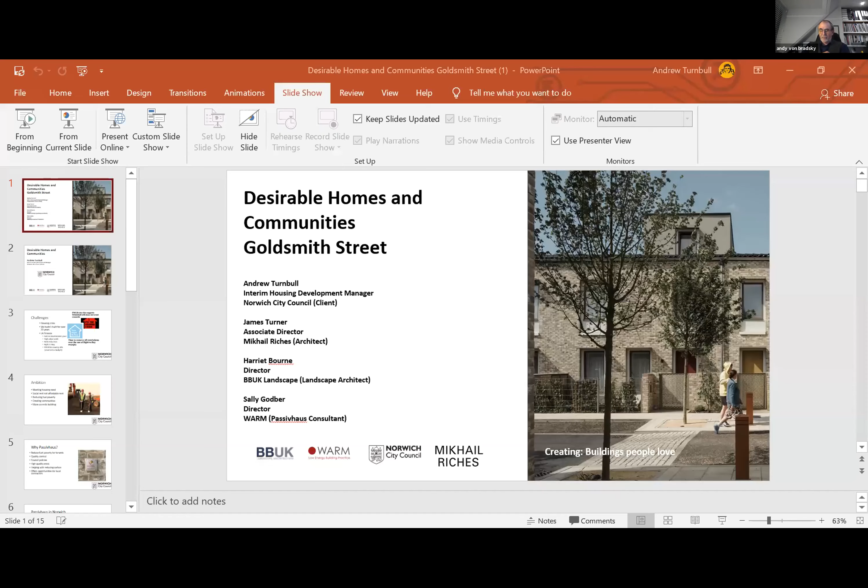So, tonight you've got myself, James Turner, who is the Associate Director for Mikhail Riches Architects, Harriet Bourne, who's the Director of BBUK Landscape Architects on the scheme, and Sally Godber, who's the Director of Warm, who are our Passive House consultants. I'm the Interim Housing Development Manager at Norwich City Council.

Been an interim now for, well, it's getting on for 1.5 years, so it's about time it was made permanent. But just starting off with how we've got to where we are and how we kicked off with Goldsmith Street. So the challenges that we have as a council are, obviously we've got a housing crisis, we've got housing needs in Norwich for at least 240 social rented homes each year.

As a council, we hadn't built for over 20 years. I think 1992 was the previous scheme that we built. And primarily that was down to right to buy, which kind of prevented us from using our money to build.

We had a number of other challenges around our finances, with cuts in government grant, threats of high value voids that we would have to pay subsidy for our high value properties, a 4-year rent reduction that took, I think, 30 million out of our 4-year plan and 250 million out of our 30-year plan. Increased right to buy through it, the discounts being reinvigorated, and we've had issues with up and down on Public Works Loan Board borrowing rates.

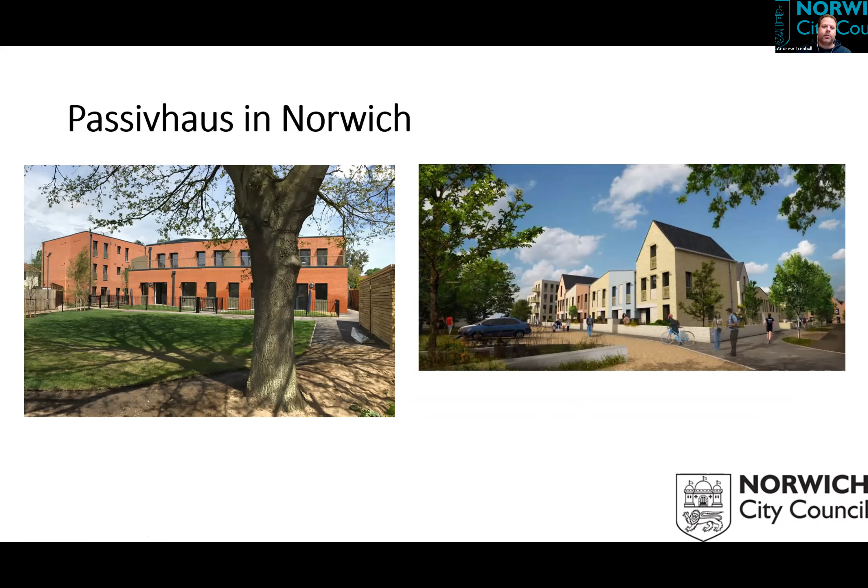And we felt that was a bit of a waste of space within the city. So having looked at that, and having talked to the county council about buying that care home, we felt we could actually form a better site and really up the density in this area.

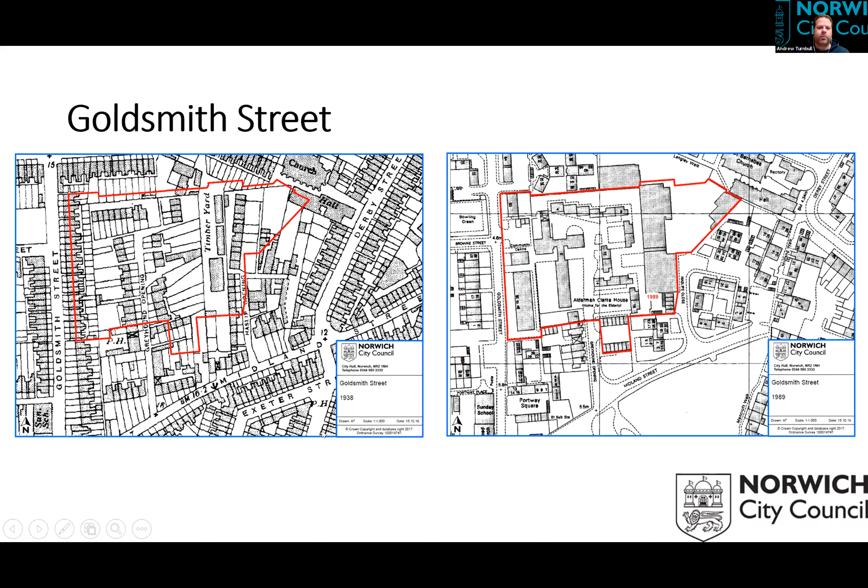So the decision to decommission the sheltered bungalows, which you can see in the picture, was taken in 2007. We were then working with 3 registered providers rather than delivering it ourselves, and we persuaded them - there were a couple of really forward-thinking people in the council.

One, Jamie Radcliffe, who's now an executive director at Network Homes, and our design and conservation manager, Ben Webster, who's still with us. We managed to persuade those registered providers to go down the route of a RIBA competition to select the architects. So we ran that competition in 2009.

The 3 RPs, for various reasons, then kind of dropped out over a period of 3 to 4 years. And what happened in the meantime in 2012 is that the government announced they would relook at the housing revenue account and allow local authorities to keep all of the rents they received from their tenants. Prior to this, Norwich had to pay £9 million a year in subsidy to support the national housing revenue account. So by keeping all those rents in return for taking on a proportion of that national debt, it meant we had about £30 million worth of headroom.

Number one priority for our members and for our tenants was to build more social housing. So in 2014, once we got our heads around the amount of money that we had and what we wanted to do with it, we re-engaged Mikhail Riches because we were party to that original competition. We were able to just pick up the phone to them and start again. I think I did worry David Mikhail, I don't think James was in the room at the time, by saying, oh, we've had a look at it and that design you've done, we really like it, but could you just make it passive house as if it was the easiest thing in the world? So once we'd got that on board, in 2016 we achieved planning permission, and in January 2018 we started on site. It was about an 18-month build period. So we completed the first phase, and I'll come on to that in the next slides, in June 2019.

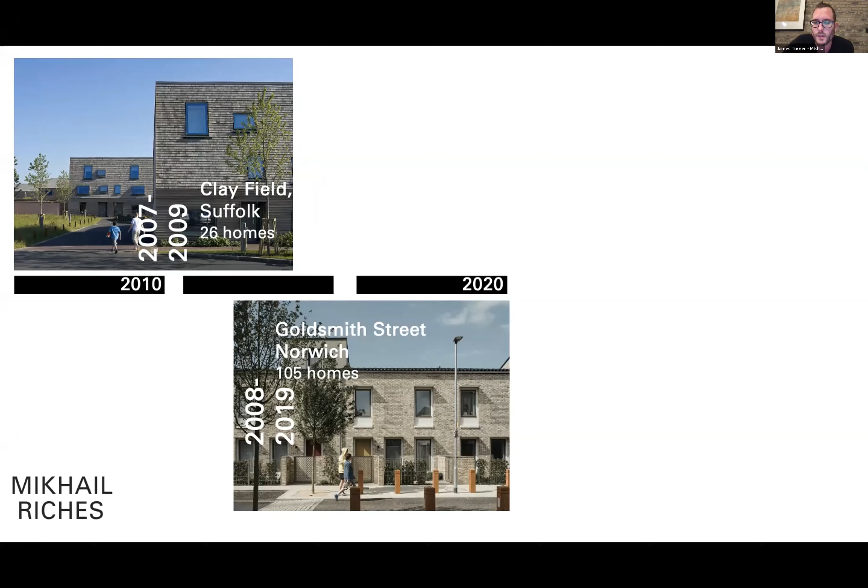That's something I'd say that in our work moving forward now as a practice, we're finding that to get good zero carbon schemes to come forward, the master plan is essential. And I know as part of the brief that Tabitha's put together, there's a real focus on zero carbon. Understanding simple things like sun orientation is absolutely key, and if you get that wrong from the start, you'll be fighting against it all the way through. So there's a little opening tip.

Just in terms of Goldsmith Street, obviously Andrew's already said, and Andy, we've won a number of awards. It has been put on a bit of a pedestal, and it's slightly bashful sometimes when people say lovely things about it. But I think what's really important is that we share that learning.

I think the real key takeaways are this idea of a low energy passive solar design, so embedding a solar strategy into the master plan. Passive house we use very much as a shorthand - I think Andrew and Andy's point about quality is key, and passive house gives you a route to getting to zero carbon by embedding it in the fabric of the building. That's a very simple takeaway from this talk.

My introduction to Tabitha was actually at a conference where I was speaking and she didn't realize this was timber construction. I think maybe a lot of people don't realize that behind this brick facade, there's actually a timber frame that's insulated with Warmcel. We work with a company called Signum Timber Frame, who built the frame in a factory, so it's a kind of hybrid MMC project.

Because of the width of the walls, we built part of it in the factory and then balloon-framed it on site and filled it with insulation. That's something we developed with them as the supplier. And then, I'll come on to this, the ability of a timber frame to reduce your carbon impact is huge.

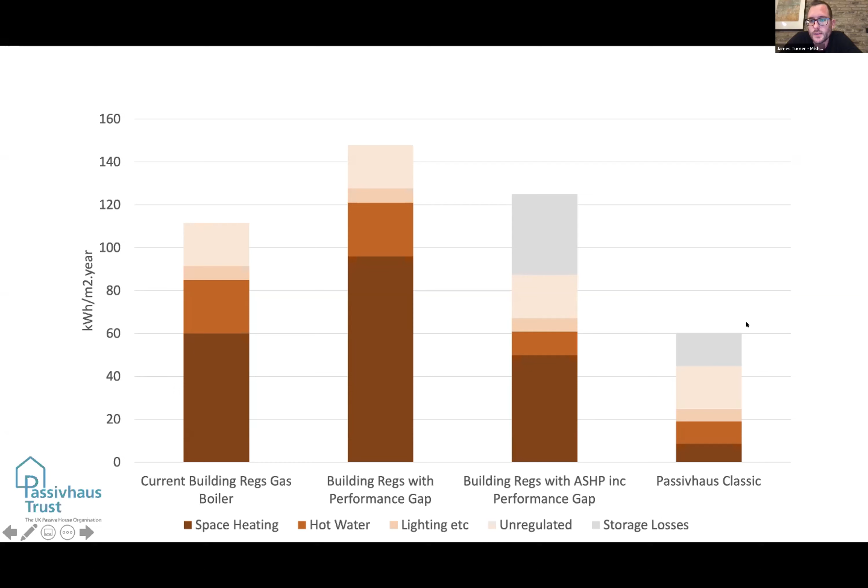The difference you can see between these different charts is what's called the performance gap, and that's something Passive House drastically reduces, because you very much get what you designed with Passive House. I'm sure Sally will expand on that later. In simple terms, you can see the difference between where building regs are currently targeting and where you are with Passive House - so very low energy demand.

From a fuel poverty or resident point of view, you're looking at a bill of around £150 a year for a 2-bed house, so very low. Long term, without that performance gap, your energy demand stays fairly consistent, whereas otherwise it's almost increased exponentially over time from the point it was constructed.

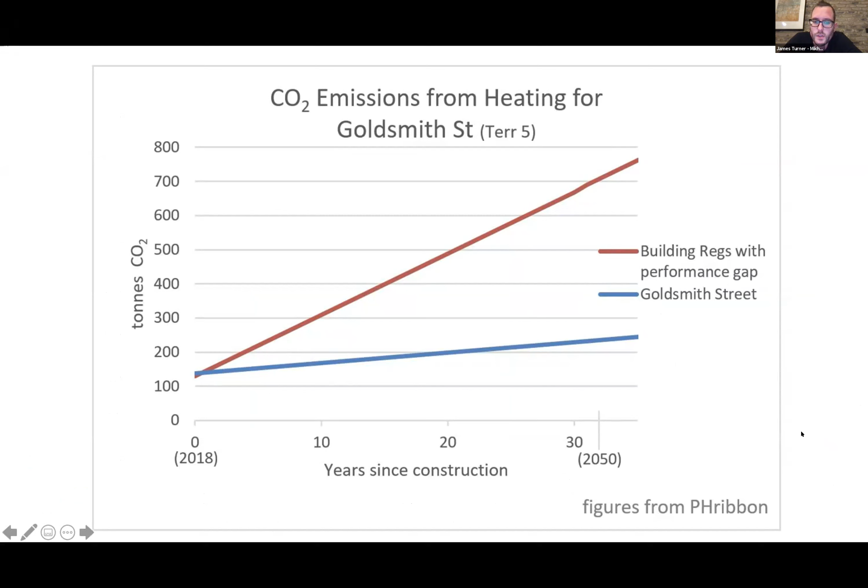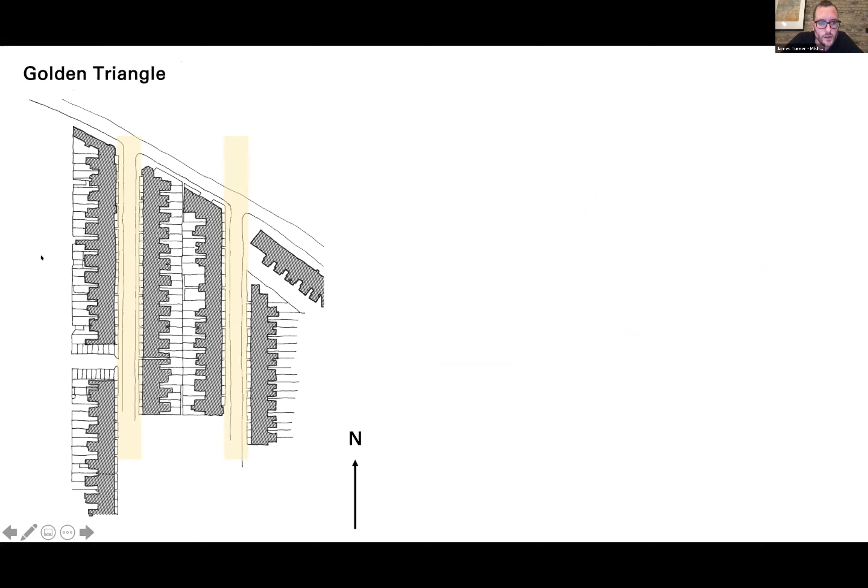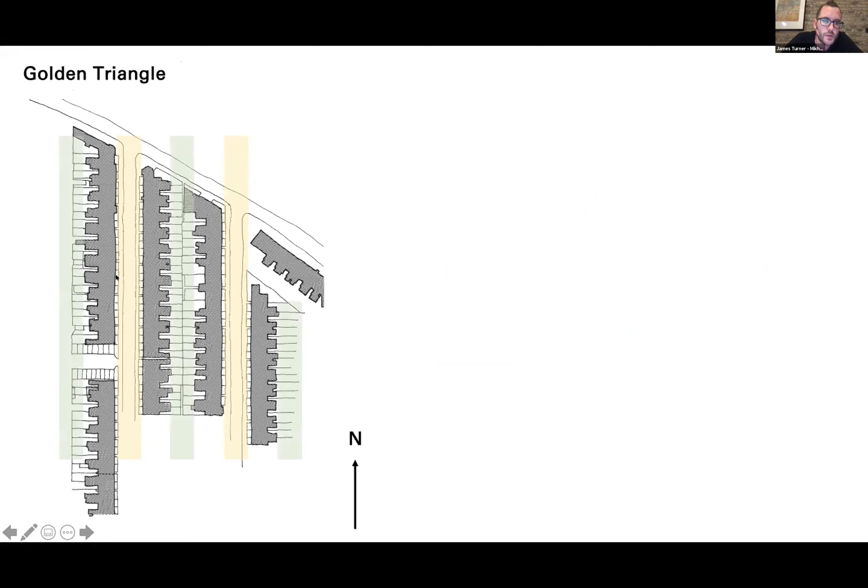Just to expand on Andrew's history of the project, one thing we did at competition stage was really look at the local vernacular, in particular the terrace streets of Norwich. This drawing on the left shows typical 19th century Victorian terraces with a 14-metre overlooking distance between the fronts and a 14-metre overlooking distance at the backs. We took that and turned it through 90 degrees with an east-west street direction, which gave us our solar master plan and echoed that local urban grain.

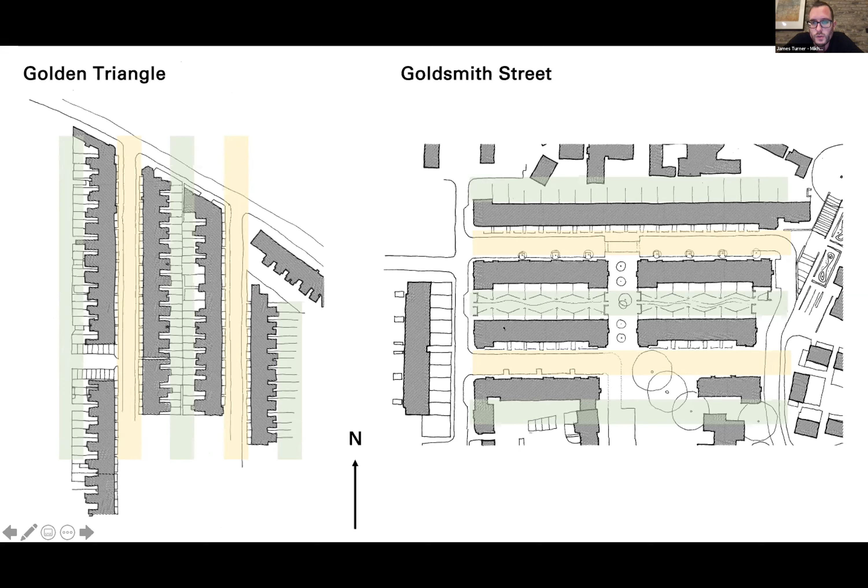That was really well supported by the planners, but it also meant we got more development on the site by compressing the overlooking distances while still creating good spaces between the buildings, which Harriet will hopefully expand upon. So that's what it looks like as a site section.

I think critically, again a very simple takeaway from this presentation, is understanding how the sun moves around the site. I've mentioned the east-west solar aspect, but it's also about understanding how you get sun into a building in winter, and making sure you don't have one building overshading another.

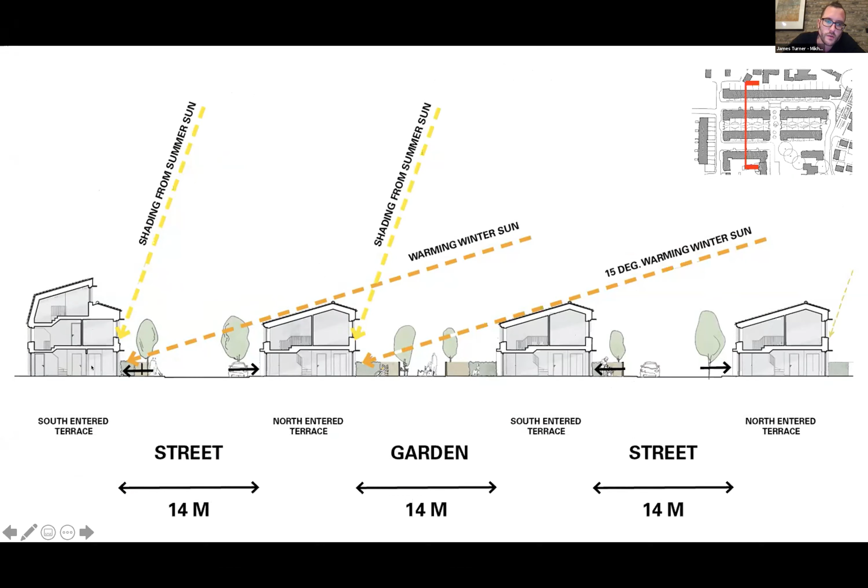So, a quick overview of the overall master plan. I think what a lot of people are surprised about with Goldsmith Street is it's a very simple scheme - not a shouty scheme. You've got terraces of houses with flat blocks on the end, and really nice, generous communal garden spaces between terraces where only residents can access. So it's lots of very simple ideas, but I think the execution and the quality of what we've done is the hard thing to achieve.

Something worth noting as I flick through these pictures is the spaces between the buildings and how they work. Architecture doesn't just stop at the building elevation - it's really considering things like your front garden wall, gates. These are south-facing gardens, and I don't think I've ever seen a scheme where front gardens going directly onto the streets have been so well used by residents. I think that's testament to the landscape design and the feeling of security from having something as simple as a gate on your front garden that's immediately open to your kitchen.

Other little details are things like meter boxes - we've worked really hard to conceal them across the scheme. We've allowed small spaces outside people's front doors where, within a matter of weeks, residents have taken ownership over that tiny little space directly onto the public pavement, putting their own doormat there. I think this is really lovely and shows that sense of ownership within the scheme.

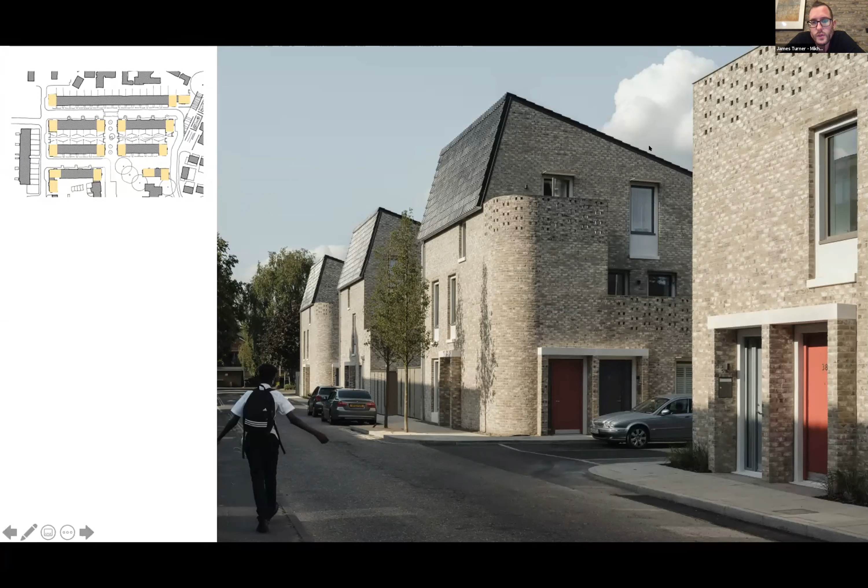There was a point earlier about COVID. I think one of the particular ideas around Goldsmith Street with respect to flats is there's no common parts, which is quite unusual. A lot of schemes have a lift core and shared entrance with a series of flats off that space. One key issue Norwich has with their flat blocks is the common parts, and people doing things in there that they shouldn't be doing. We took that as part of our brief and decided to develop a scheme with no common parts.

Each of the flat blocks at the end of each terrace has a door which directly accesses onto the street, so everyone has their own front door. Especially in this current situation with COVID, that sense of ownership and independence of not having to share a space with other people must be a fantastic place to live compared to other situations.

Looking at how the building performs against the 2030 targets, which is part of the criteria being looked at - the energy demand is very low on Goldsmith Street, primarily done through Passive House, fundamentally reducing energy demand from the outset. Interestingly, the focus of our brief was to achieve Passive House, but since then, and since the Stirling, there's been a focus with the climate emergency on embodied carbon within buildings. We retrospectively looked at how Goldsmith Street was performing, and it's coming out close to the RIBA 2030 targets without us really pushing it.

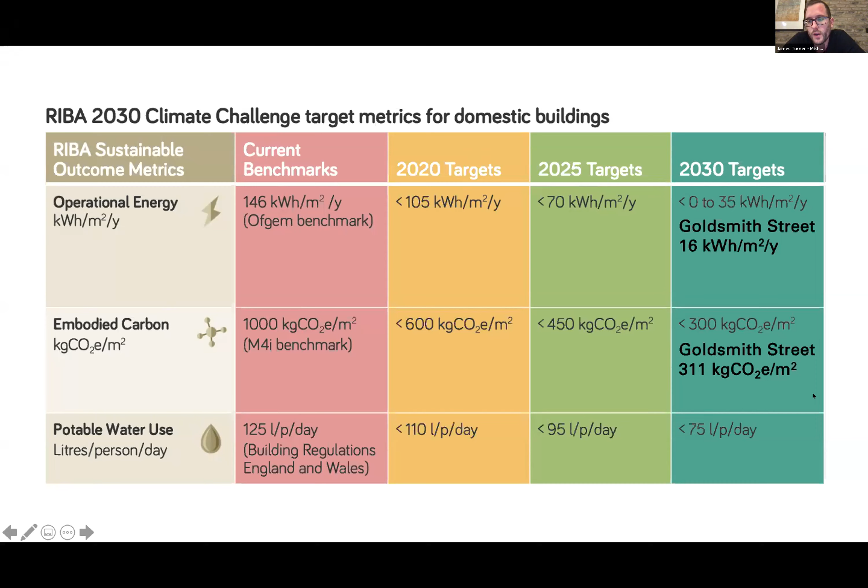That's something we're doing on our current schemes. Interestingly, that's primarily due to the timber frame and timber sequestration. So just broadly, that's how the carbon is counted within the project.

Thinking about the palette of materials - this is a low cost project, and we thought very carefully about what materials were specified, their durability and maintenance. That's worth noting as a quick takeaway.

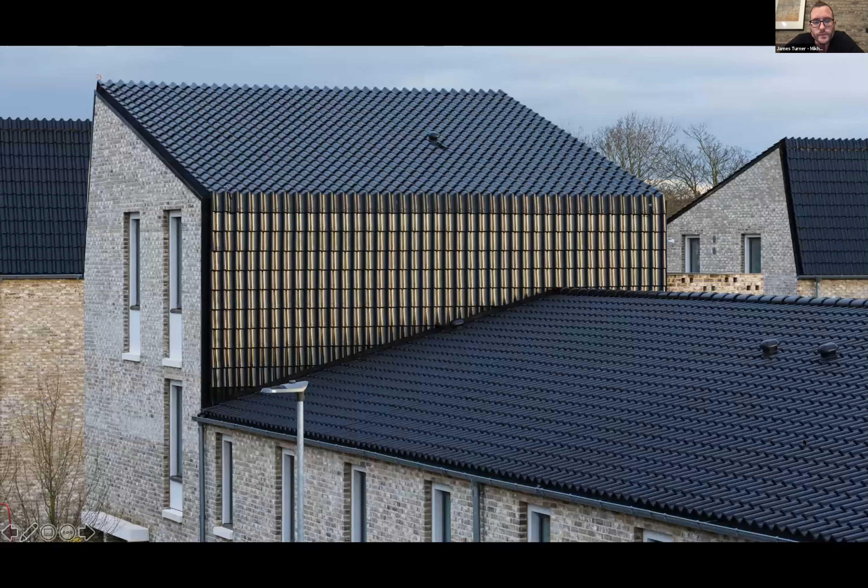Lastly, one of the huge changes we made during the scheme - it was coming in over budget, and we made a call to change the roofs from zinc to tile, which offered a huge saving to the project. One of the things that worked incredibly well as a process on Goldsmith Street was the value engineering, and for me this shows that value engineering can be beautiful. And with that, I'll hand over to Harriet.

Sorry, technically a bit incompetent. I am not at the point I thought I was at. I beg your pardon.

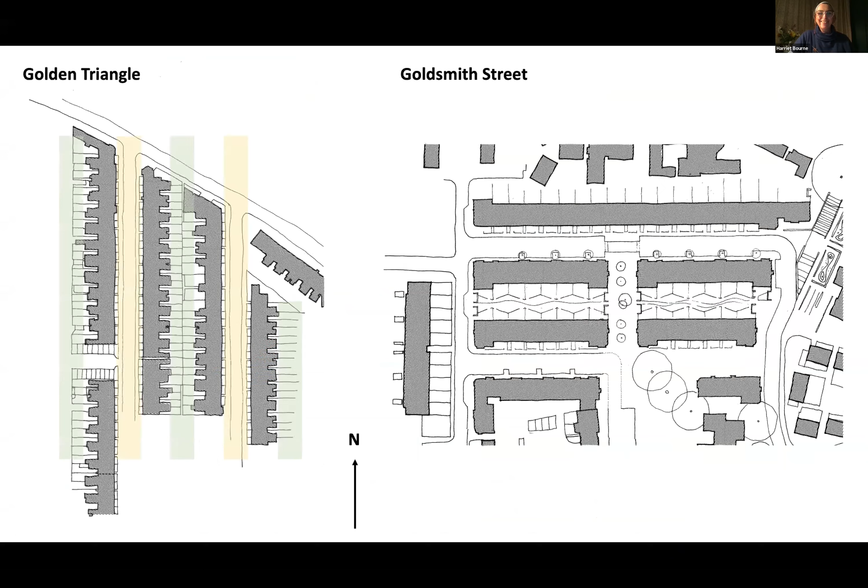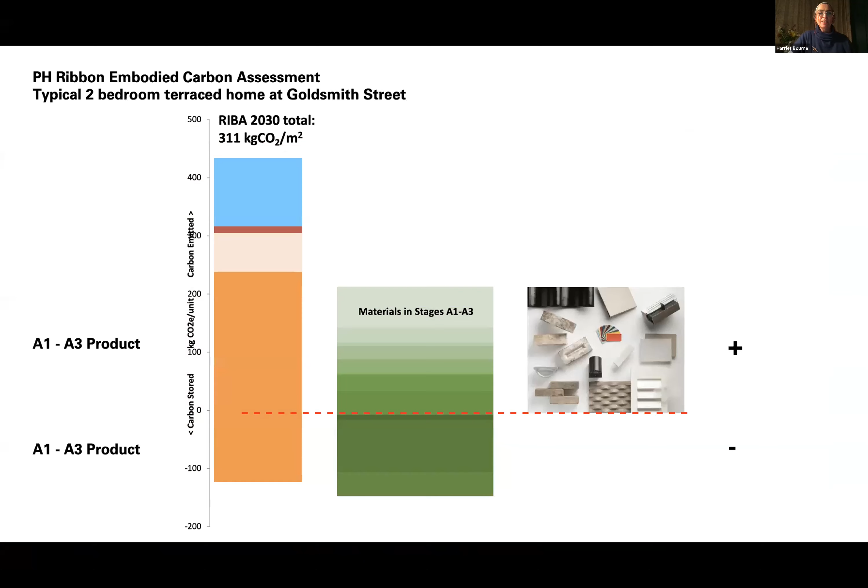Nearly there. Lovely pictures you can see again. I was lined up on the right page, so apologies. I'm blaming my computer. I'm Harriet Bourne.

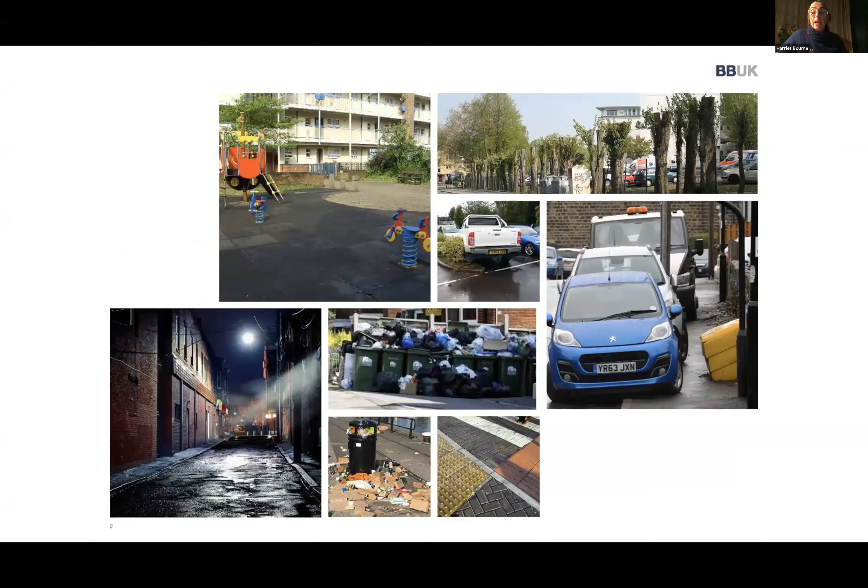I am director at BBUK Landscape Architects. We worked with Mikhail from about 2014 onwards, looking at, not surprisingly, landscape and public spaces.

I've started with this rather unbeautiful slide just because I think it's important to understand that however beautiful the houses are, and the houses are very beautiful, if the landscape isn't right, or if the spaces between the buildings isn't right, then it's just never going to work.

For example, if the play area is in a sea of horrible black rubber crumb tiles, it's not going to be well used because it doesn't feel safe. If the streets aren't overlooked, then they're going to be empty. If the streets aren't designed to take parking, then people are going to park on the pavements, and there's going to be nowhere for people to walk. If there aren't spaces for people to put bins, then the bins are going to sit on the street, and they're overflowing.

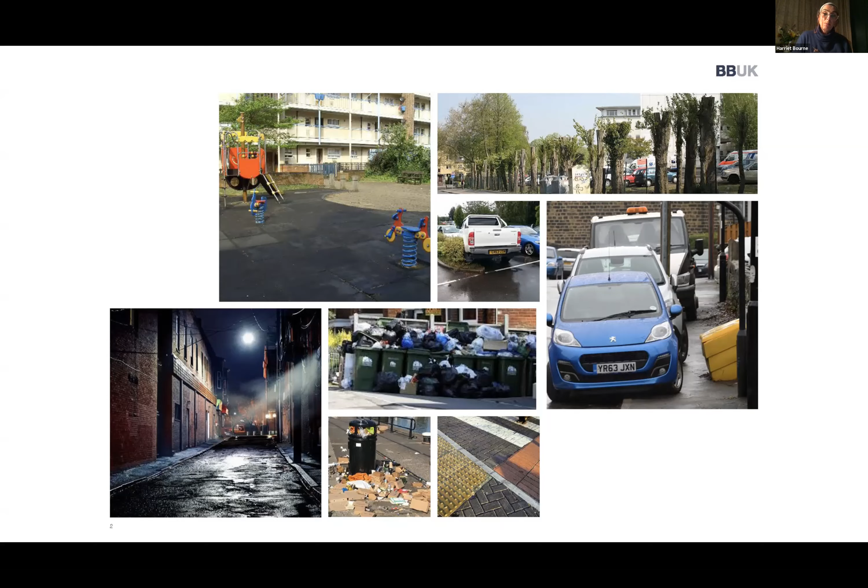Alongside that, another thing that is really important is obviously maintenance. If a scheme isn't maintained properly, the buildings will crumble, but the landscape is the first thing that you see. So if there's rubbish on the ground or the trees aren't pruned properly, then the whole place starts to fall apart. And what makes a truly sustainable scheme, not just in terms of building fabric and low-cost heating bills, is the community. If the community isn't truly sustainable, then the scheme is not going to last.

So when we look at a project, we start by looking at the way that people are going to use it. One of my very favorite artists is Bruegel, because he centers his work around people with activities, and not just one activity, but a whole variety of activities, which is what you get in real life.

So you want to be able to feel safe so that your children can play out on the streets. You want to feel that you've got places where you can meet your neighbors. You want to be able to park your car safely. You might want the car to be able to drain into a space which is going to attenuate the water so you don't get flood issues. And you want to be able to stand and gossip with your neighbors over a fence.

On top of that, we want to make sure that the place is enhanced with planting, with appropriate planting, that has interest all year round, but also has a seasonal interest, so that you get an explosion of colour and flower in the spring and summer, and then it might die back in the winter. But particularly in an urban area, seasonal interest is really important, and it will also start to bring in insects and butterflies and birds.

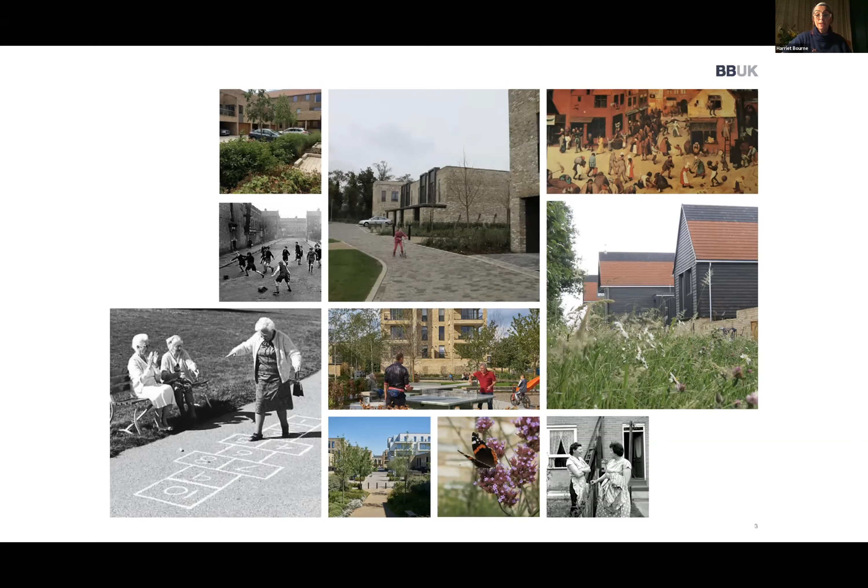The what we're calling semi-public routes, which is where you might go through a more planted space, which might have local doorstep play for the younger children, through to the semi-private spaces, which are the spaces between buildings, which are only accessible for residents within those terraces that open out onto that space.

And then the public open spaces, which connect through to the local context, so the local existing housing, because that's one thing that we felt was really important, that it doesn't sit isolated on its own, this brand new lovely development with lots of architects going to look at it because it's won prizes, but actually it talks to the people that are already living in the area.

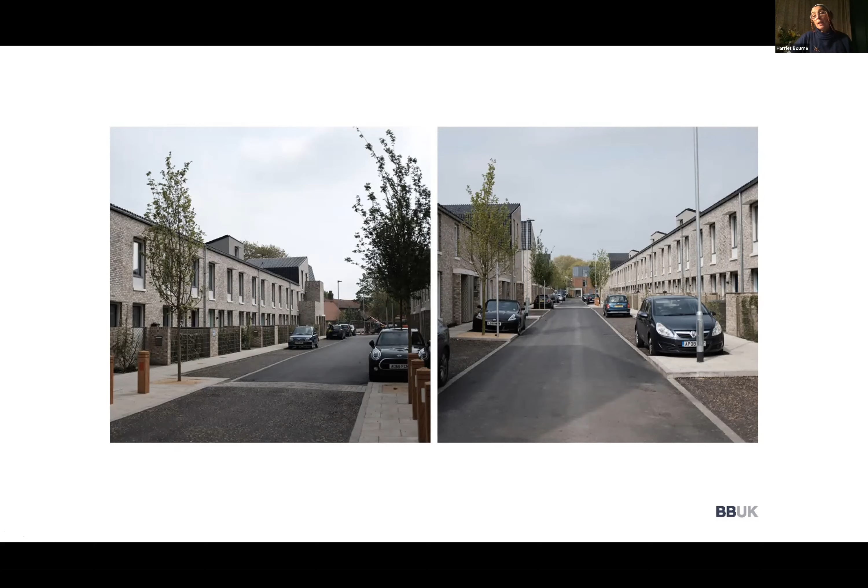The other thing we did with the front gardens was - originally they had hedges to separate the front garden from the street. Part of the value engineering exercise was to take the hedges out and put in fencing. We've planted ivy up the fencing so that when it matures, they will be greened boundaries. We managed to save a lot of money by taking out hedges and having this kind of fence and climber instead.

As James pointed out, people taking over these spaces for themselves is really charming. House number 2 put up hanging baskets, and since those baskets went up, houses 4, 5, 6 and 7 have got them too - so we've got a whole row of people with baskets hanging from the porch. Other people have put furniture out the front where they sit and chat to people and their neighbours as they walk past, and others have added bedding plants and gnomes to their gardens. So there's a real variety.

Unusually, we did a planting scheme for all the front gardens, most of which is staying, but other people have taken what we proposed out and put in brighter coloured or different plants, which I think is also really nice - that they've taken ownership.

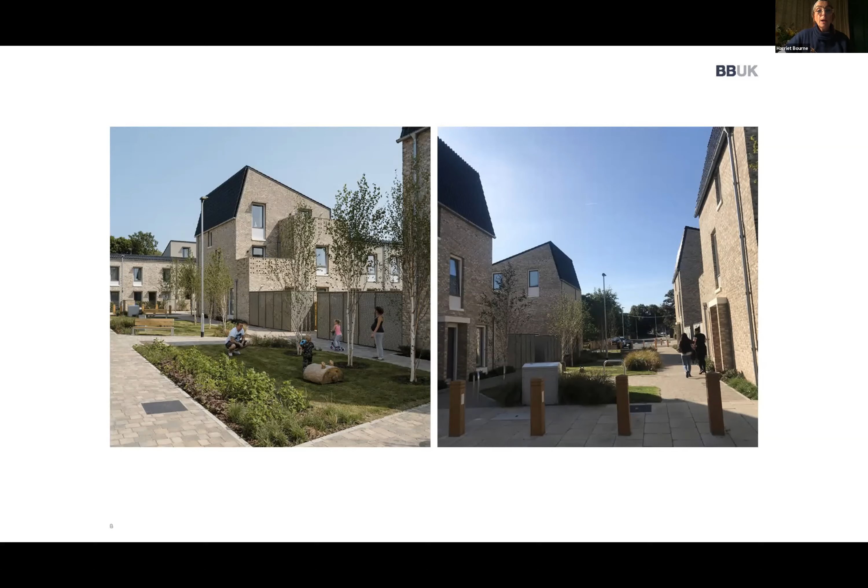The semi-public spaces, which are the non-vehicular routes through the site, have got doorstep play. This encourages people to walk through the site rather than drive, because there's something for the children to do on their way through. It's also an opportunity for the community to meet people that aren't in the terraces that open onto their Ginnel - they're actually available for everybody across the whole site.

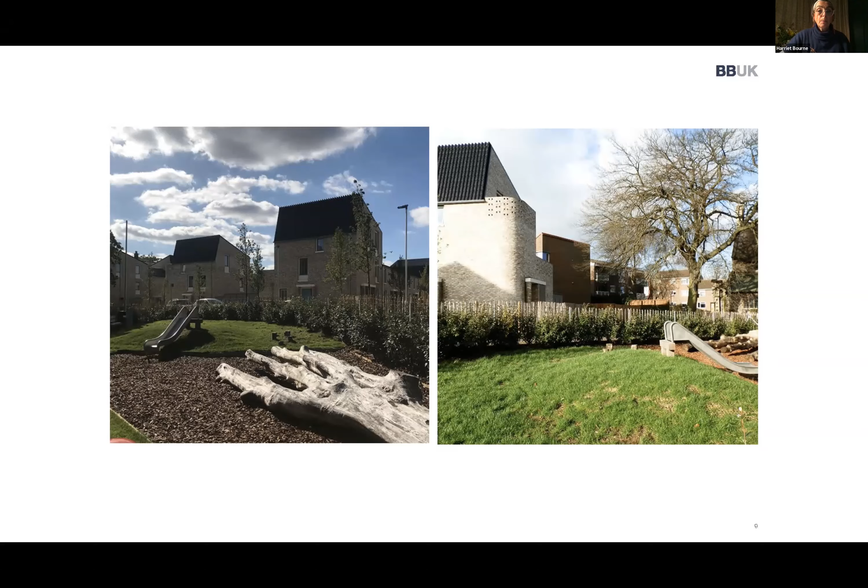And then the more informal kickabout area, which is centered on a couple of existing trees, one of which actually died, so we replaced that with 2 further trees on this site. We've planted about 5,500 new bulbs, and I'm really hoping that lockdown restrictions lift so that we can go and have a look at those coming up this year. I think, Andrew, you'll be pleased.

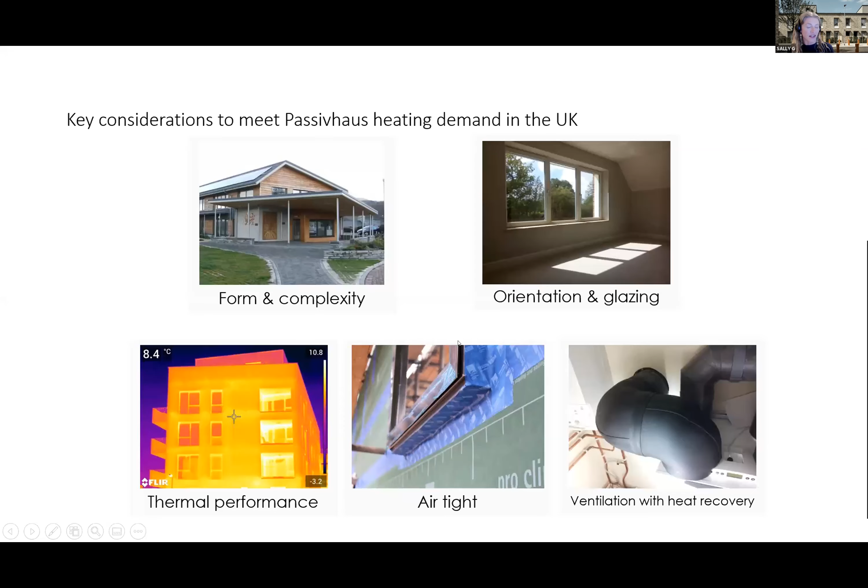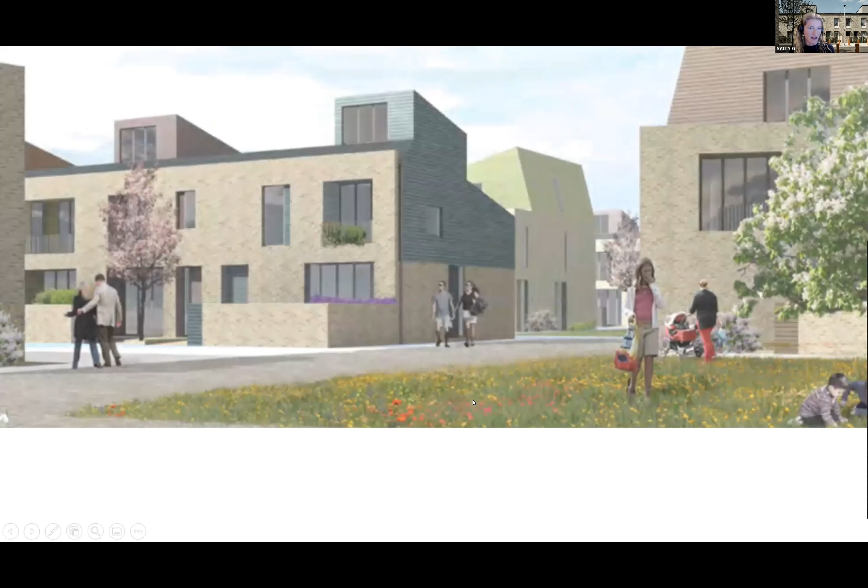On form and complexity - I'm hoping that, having had Passive House rammed down your neck fairly significantly by Tabitha, you really understand how important it is to think about surface area. Heat loss is a function of surface area - more surface area, more heat loss. That's the Passive House starter pack, and I'm assuming you've all got that.

When we started looking at this scheme, this is what it looked like when we first got involved. We were pretty happy - we had a load of terraces and a lot of repetition. This is the first point I really want to nail home: when you're looking at a quality product, be careful about the amount of complexity you put into a project. That's the most important tool you have. All that complexity adds cost to the scheme if you want it done well. So if you want something done well, having a lot of repetition is a huge opportunity to do a good job of it.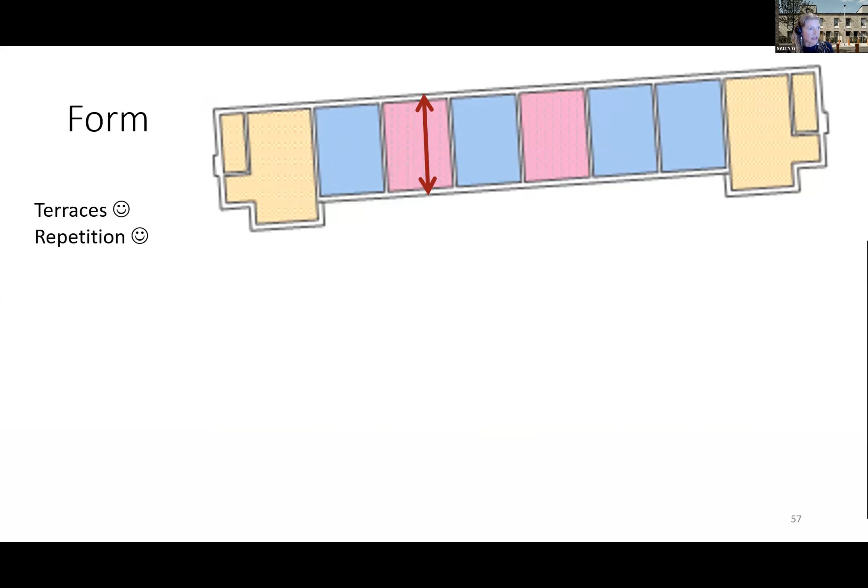There were a couple of things that made it quite tricky though. In terms of form particularly, the layout meant the front-to-back distance was actually quite short, so because the buildings were wide, there was quite a lot of surface area - the form factor wasn't as good as we originally expected. To put that in context, compared to another scheme we just completed, Rainham in Essex, which had a really narrow width but very long front-to-back depth, the difference in heating energy was about 1.5 kilowatt hours - which compared to our Passive House maximum of 15 was quite considerable.

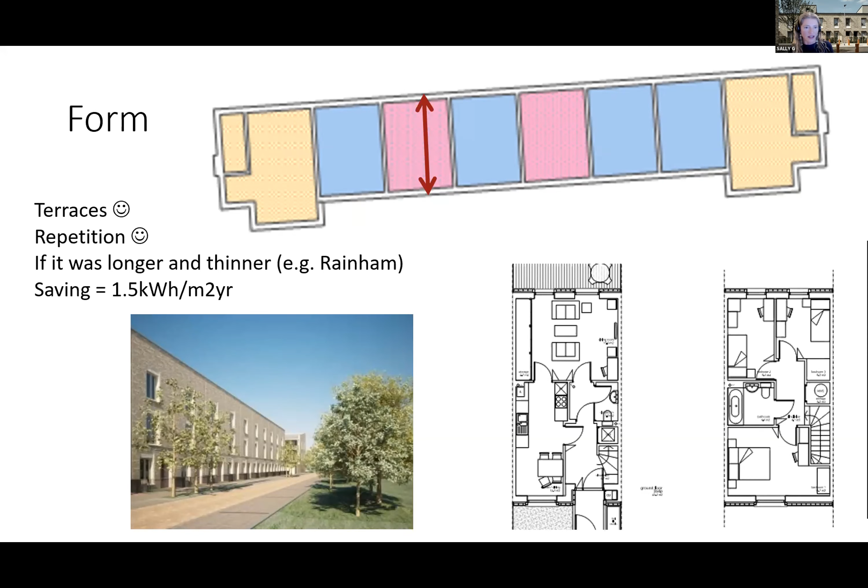There was a long discussion about the impact of changing the shape and looking at the plan overall, but in the end we decided to stick with the original proposal. The whole Passive House methodology isn't about enforcing design changes, it's about making informed decisions and using the modelling to give you the information to decide whether something's right or not.

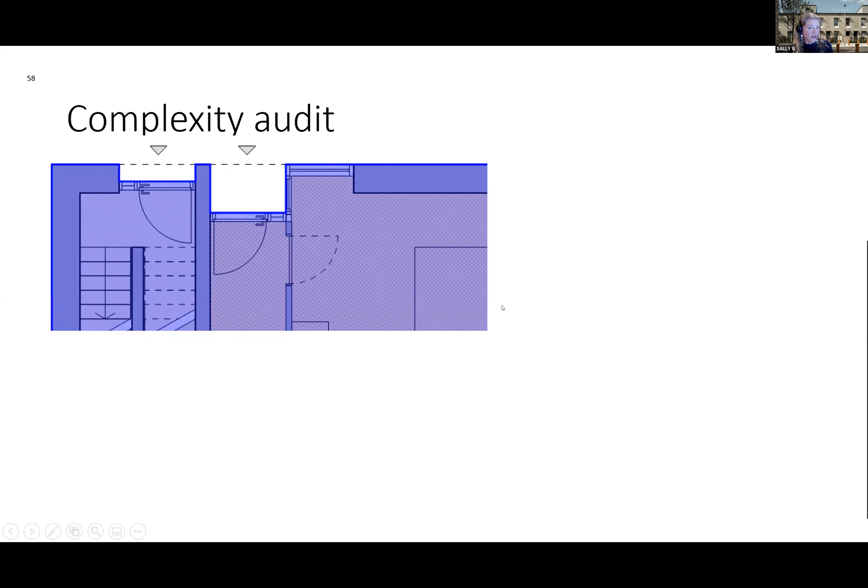Another thing we looked at in terms of complexity was this particular detail, with an inset doorway, which is really problematic - we've got lots of glazing meeting each other, the glazing meeting the floor, the top of the glazing and the wall meeting the roof, lots of really complex details. The conclusion was to remove this and create that instead. I think this is one of the most lovely design solutions - the fabric design is really straightforward, the line of the fabric just runs straight through, and yet we've got these beautiful porches which sit right onto the pavement. That, to me, is a massive success.

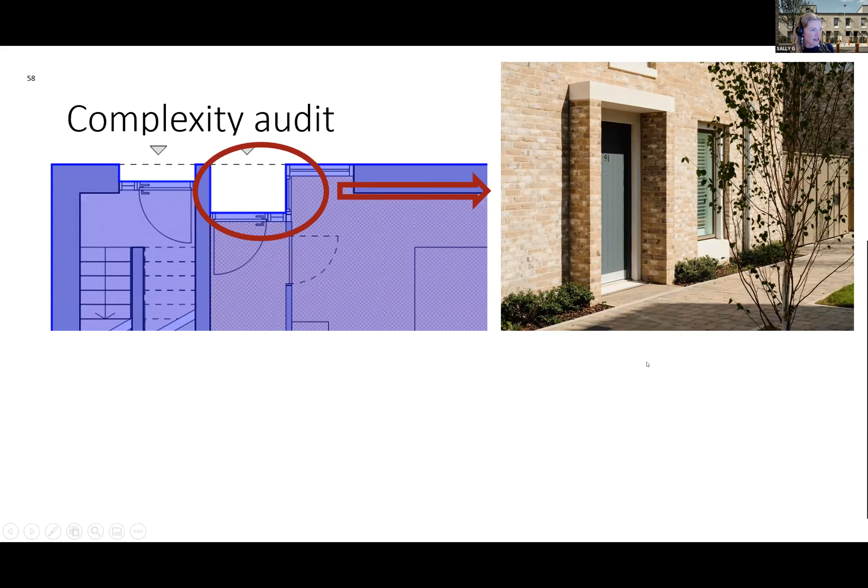There were some other things along similar lines that we did. In a similar way, we ended up with the insulation line going up and along the pitch. It would have been better from an energy point of view to have it going straight along the ceiling, again reducing the form factor and meaning less heat loss area.

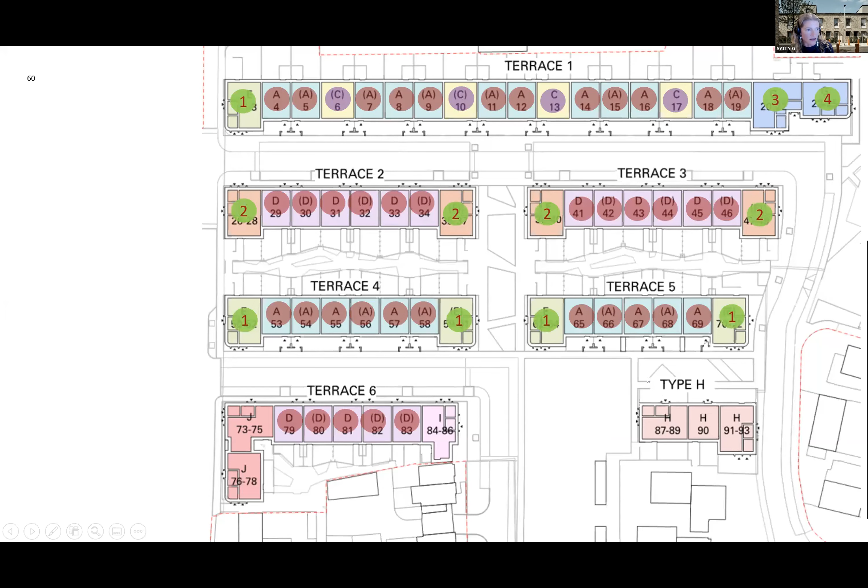This was decided to have real value to the scheme, so this is where we went with it. The debate is the important part of this. The repetition part of this, all of these houses are pretty much identical, and then we've got a few more houses which are pretty similar, but then the complexity really comes in with the flats where there's a huge amount of variation. Unfortunately, because of that variation, that's where the time was spent.

So the houses, rather, lots of repetition, very simple, beautiful. The flats are very beautiful too, but complexity meant they spent a lot more time working on those. So really pick carefully which areas you want to work on.

And then, super carefully, I just want to go over really quickly about glazing, particularly orientation. We were super happy with this facing north and south, not because of the energy balance stuff, but because of summer comfort. In terms of summer comfort, it's much easier to deal with buildings that face north and south, or have their windows north and south, in comparison to east and west. So yeah, we were properly smiley face with that.

But there were some things that weren't so great. The design was kind of principally aimed at a lot of glass. I think with where we are at the moment with future climate predictions, we really have to consider glass as the icing on the cake. It's the really sparkly stuff that brings a building alive, creates the most beautiful environments inside, connects us to outside, gives us fresh air—all massively positive. But at the same time, it's the gold sprinkling. We can't just completely adorn our buildings with it anymore and expect it to make them look beautiful. We have to work a lot harder. This percentage of glass is really not appropriate in any setting whatsoever anymore.

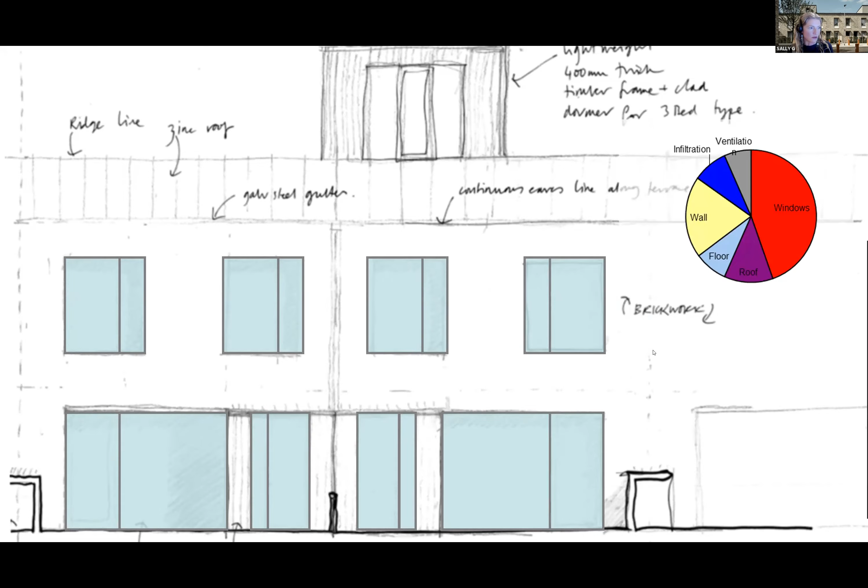So there's a lot of discussion then about which areas we should be putting glass onto. Is that valuable? Are we getting the most out of it? That's the kind of discussion we want to see, and there was a lot of that throughout the scheme. In a similar way on the flats, when we started there was glass everywhere, and a lot of work went into making them a lot simpler.

Hopefully somewhere here, if I can just get the slideshow from the beginning. So the first thing to point out, my name is Will Mawson. I'm an architect at Mawson Kerr Architects, and this was a real big team effort. Delighted to have on the call this evening Judith Sykes, Director at Useful Projects, Sarah Jones-Morris from Landsmith Associates, and Andy Downey, Elliott Wood, and a developer, if you like, but they are very much an ethical developer.

We were brought together with really the creme de la creme of other consultants, and I think it was really the discussions that happened when you bring all these different thinking people together that brings a real cocktail that leads to success. The other person I really should point out is a colleague of mine, Matt Glover, who - I'm going to take all the glory for these images - but he spent many hours penning some fantastic illustrations for this.

So the competition is really about a real big problem that we've got in the UK, and it seems to be quite specific to the UK, although there are huge climate emergencies around the planet. It's about housing and how we do volumetric housing, and obviously, Goldsmith Street aside, there are some unfortunately huge problems.

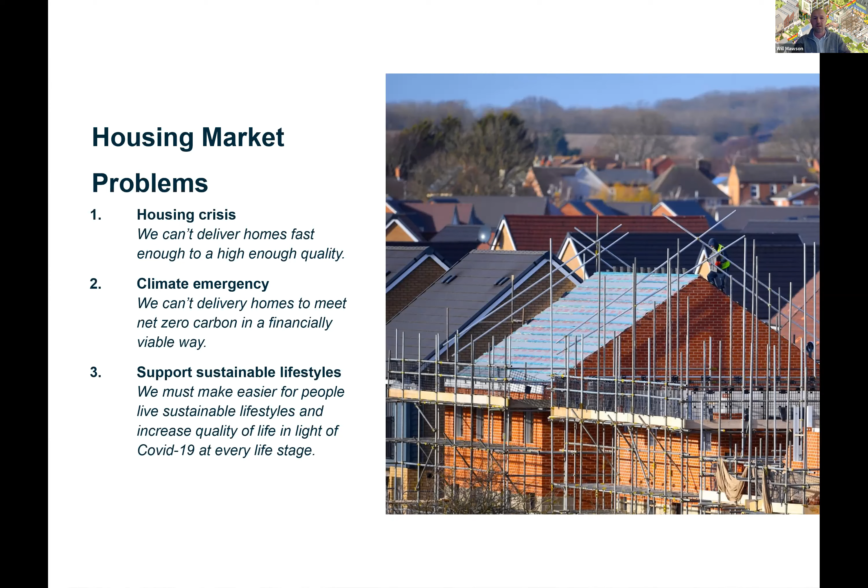Our kind of model of suburban life and other elements mean that trying to create sustainable lifestyles, and probably something that, having spent the last 12 months in lockdown and a COVID scenario, we see the importance of well-being - the whole space between houses and that external environment is absolutely crucial in terms of how we use sunlight and spaces for growing things and a whole host of other things.

Our mission statement at the start was we need to do something disruptive to solve this problem and stand for something different. Now, the way we came about it, we knew that, as picked up in the Goldsmith Street presentation which Sally mentioned, housing doesn't need to be a particularly complex form - it just needs to get all the simple rules correct.

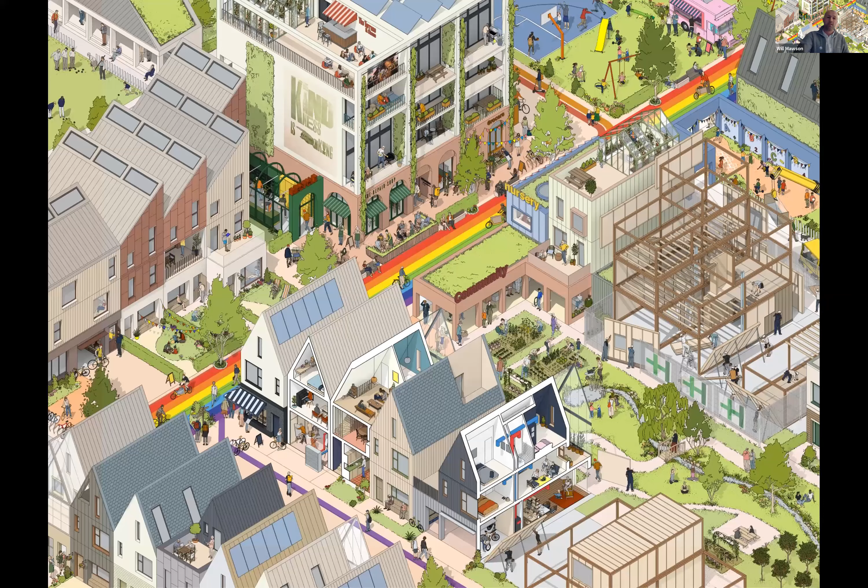But part of it that was clearly broken was the element about how you procure housing, which is something Judith will pick up and was kind of an innovative part of our solution. The competition was run in two parts, and it's worth picking up on the competition itself.

Competitions within architecture and the construction world - some people see them as quite divisive, and other people hands down say don't do them. But personally, we get a lot of enjoyment out of competitions, and also research - it's very important to use these as a research vessel if you want to take them seriously.

Also within this particular drawing, which was done for our first stage of the competition, there's actually a site underneath there, which is the site you'll be using for your competition design - the Sunderland Vaux site. Although it kind of got morphed a little bit as things moved on - I don't know if you'll get a bowling green in there, but certainly the essence of the site was there.

We used that as a test piece to try and maximize density and really push the boundaries of how we're going to do the layout on this particular piece. Amongst all the noise going on in this amazing drawing, if you strip it back, there's actually some quite simple forms, repeated as well.

I think that was a real key part of what we wanted to do, was to look at not creating any crazy architecture, but really pushing the little moments, like at front doors, and how intergenerational living can happen in very simple typologies. Much like we see in the beloved Georgian and Victorian terraces, how these can stand the test of time and have multiple lifetimes.

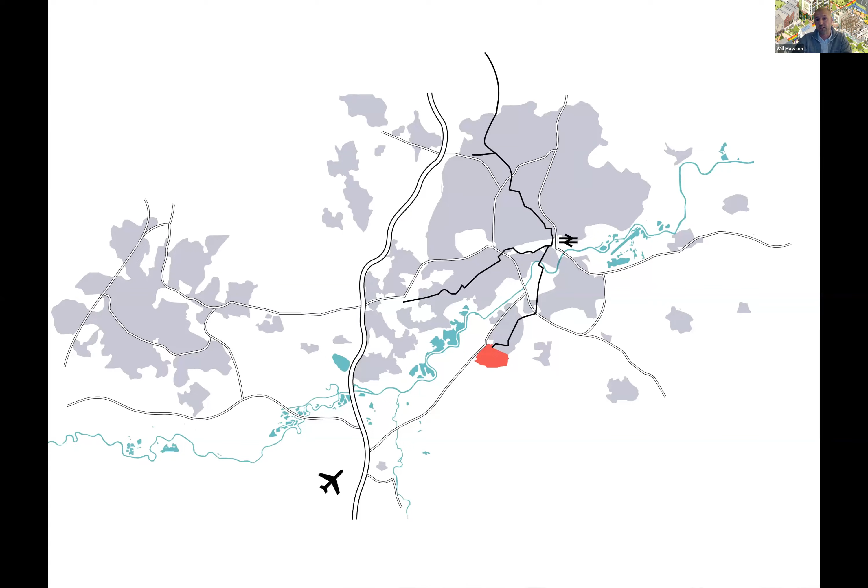A site was picked for stage 2, and just to very quickly pick out - this is just to the south of Nottingham, the red quarter there. Within that, it's essentially a greenfield site, which has already been targeted with a master plan.

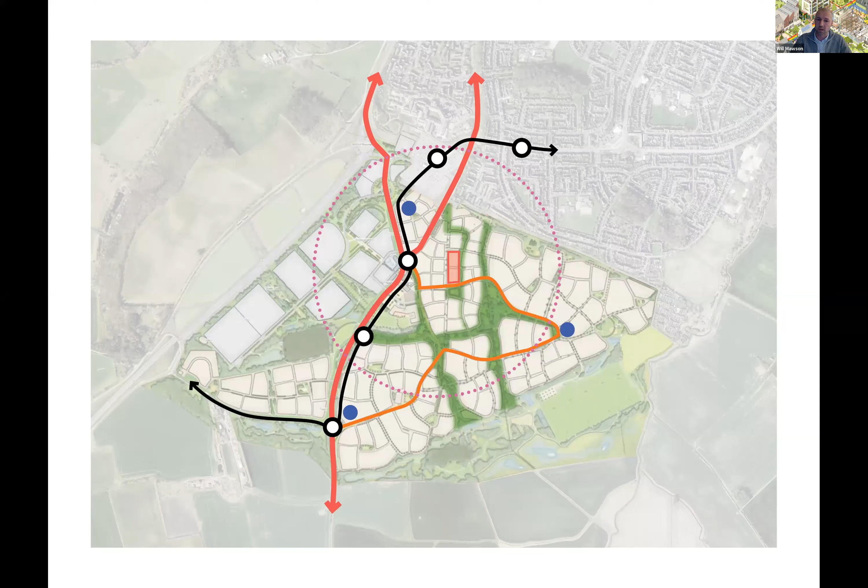These were conditions that we were given, and the red oblong there was the piece that we had to look at. Something that was really crucial in this was looking at how we reduced cars on the site, and Sarah may well pick this up in terms of how we looked at the hierarchy of the streets and how we could quite simply take cars out without telling people they couldn't have cars. But we'll get into that in a bit more detail.

To be able to look at that single couple of plots, we also looked at the slightly wider master plan, just to look at the scale and how we could create a community, because it's very difficult to design a community when you don't know exactly who's going there, but it's certainly easy to get it wrong.

So we just wanted to look at getting the right mix of uses and how we can promote the right uses at ground floor, perhaps small startup businesses, and get the right mix of housing. So different types of people have got options perhaps to move within their own streets and really create a sense of people wanting to live there.

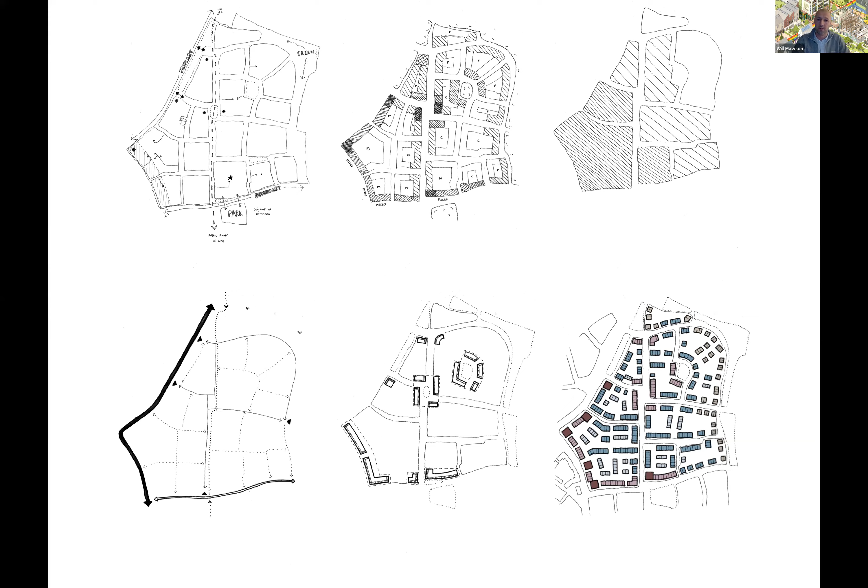So this was just going through a number of different criteria, looking at how we home in on the eventual master plan. This diagram - we worked in all sorts of different programs.

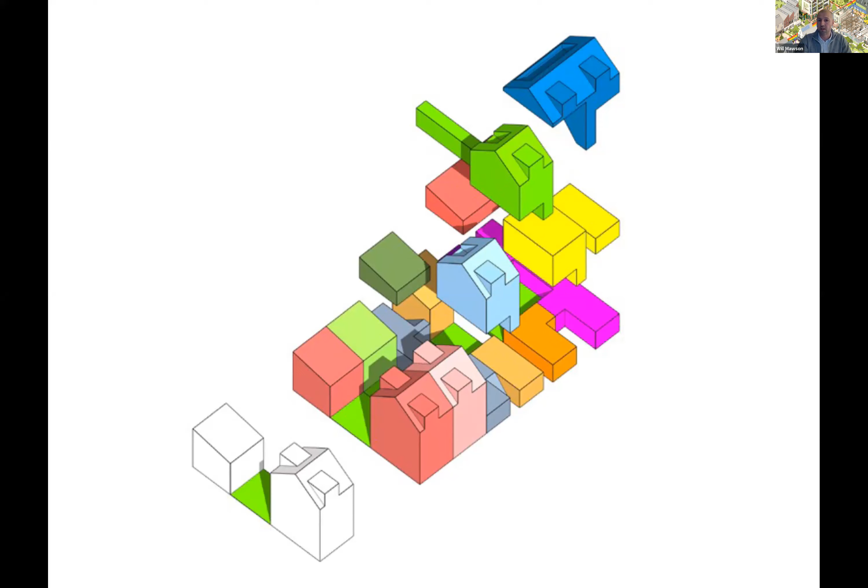This was a quick SketchUp, to be fair, done by John Norden, who is a key part of the client team, and he was looking at how, with a simple typology, you can have different ways of stacking that up - making it so that perhaps an elderly couple could have the ground floor, say, and a young family the upstairs. So this was just looking at that kind of interplay of volumes.

We used Jamboard in this particular application, where we had base drawings that everyone would get together on a Friday at 10 o'clock, and we'd have a really in-depth couple of hours sketching on top of different people's drawings, trying to work out how we could really maximize every square meter in the master plan.

Essentially there were two clusters of housing that we were asked to look at in more detail. And then, as Andy picked up, we really zoomed in on one of the houses in a lot more detail into the granular fabric of how that got put together.

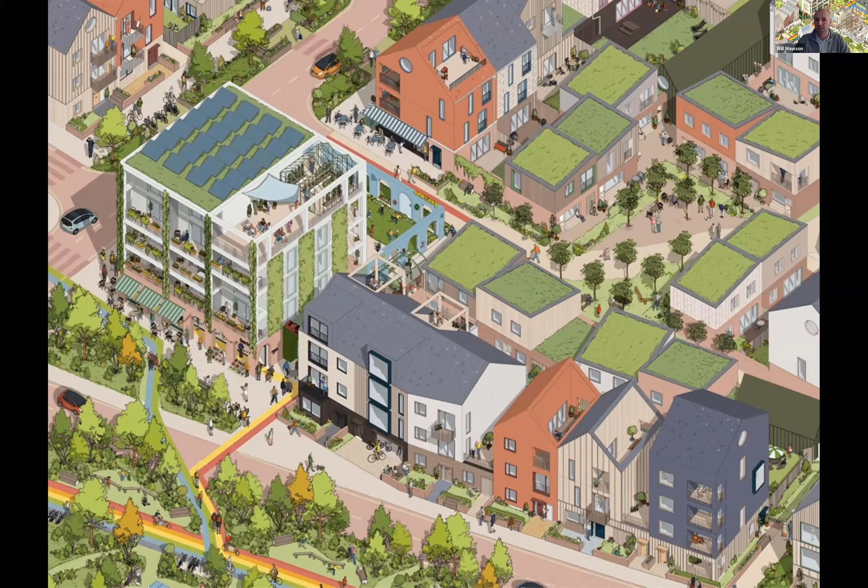As was picked up before, we were really keen to try and maximize how sunlight could get into the backs of houses, how we could create these slightly less drafty spaces that maybe people could create their own games and play space within, but also activating corners and all the key things to create a good place. But crucial to it was not allowing too much car penetration within there, so it didn't become a sea of tarmac.

An image just really homing in - you can zoom in a number of times on this to the point of just seeing all the different characters, but it was really picking up the point about making a community in a space that's had nothing but green fields. We had to really challenge how the different uses were going to happen. Amongst the group, we played out scenarios of how different people might work there, what is the right mix of people living there, and look at the material opportunities as well.

It's worth saying that there wasn't particularly a material that was the go-to, apart from obviously timber wherever possible. But we're looking at the real carbon capture discussion, which Judith will pick up in quite a lot more detail.

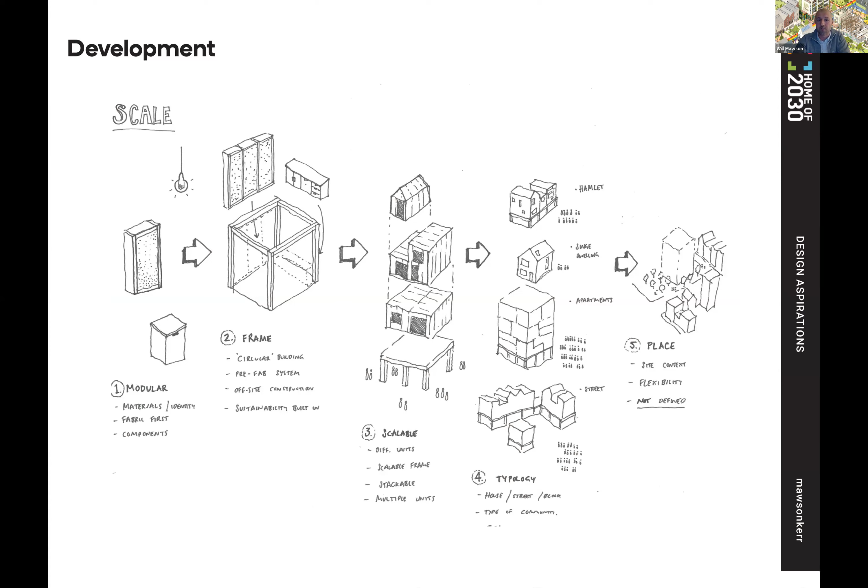An image here is just to show another way a lot of hand drawing was done during the process. So just to give you a flavour, it isn't all computer imagery. There's a lot of every format of creativity to really push the conversation along.

Thanks, Will. I'd forgotten how much I miss our Friday morning jam sessions with that image. It's brilliant.

So two of the things that were core to this proposal, as Will has mentioned, is how do you deliver at scale, but also how do we engage the range of different people, the range of different actors in the delivery of those homes. So right through from customers through the supply chain and for future residents.

And so our key enabling platform is a digital platform which really does this. If you go to the next slide - so our digital platform does this linking function in four key ways.

First, on the left-hand side, it supports the design and configuration of the master plan scheme and homes. It gives homeowners in particular some choice and ability to customise their homes and also their community through the community builder. The second thing it does is connects into and supports the creation of a marketplace.

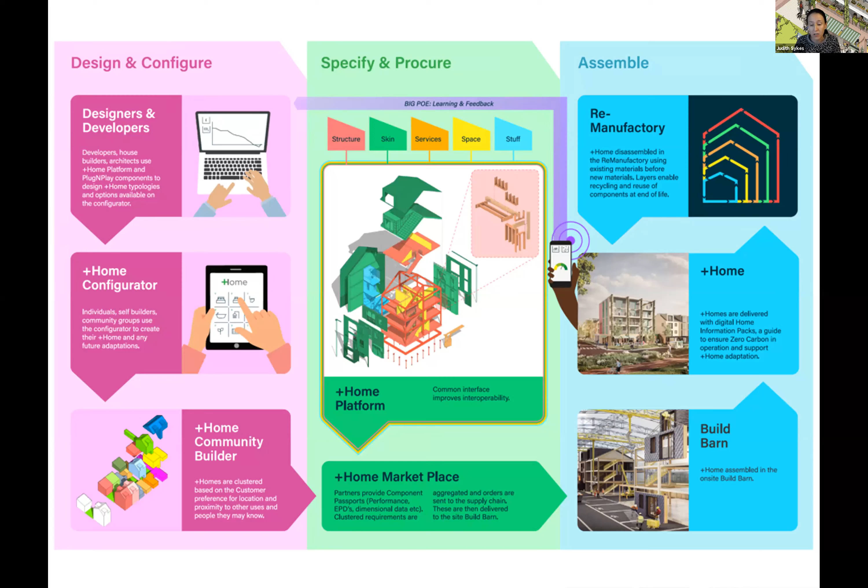And then the fourth component is that feedback loop from what we're calling big POE. So as Andy was saying earlier, it's not just about energy, but this is also a chance to capture those wider social aspects and how the place works, and then feed that information back into future design and future developments. So that's really key - I think what the judges said was core to our winning submission was this digital platform. If you go to the next slide.

Digital platform may seem like a very emergent technology, but that technology does exist, particularly things like the configurator. We use that in different guises, and I'm working on a project using it for an infrastructure project at the moment. So it is very deliverable as a piece.

Carbon performance was absolutely critical. This is a very similar slide to the one James showed earlier, mapping Goldsmith Street to the LETI and RIBA Challenge targets, and we've done the same here. I think what the Goldsmith project showed was that what we're suggesting is not undeliverable - we can deliver against those challenge targets. What we really need to do is work out how to deliver it at scale, and hence our platform approach was our mechanism for achieving this.

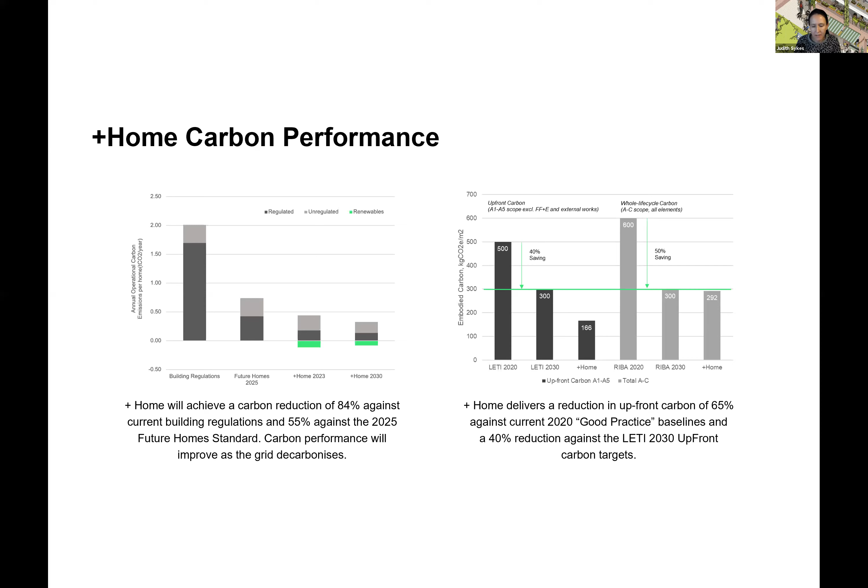So of course we are mapping well against all of those RIBA and LETI carbon challenge targets. If you go to the next slide - it's the platform, but it's also this component approach, and the really careful choice of materials through product declaration statements, which helps us achieve those standards. But it's also coupled with very specific detailing about how these components go together. Andy might talk a bit more about the plug and play approach, so that when you're putting together these homes, it's really easy to achieve that environmental performance we're talking about.

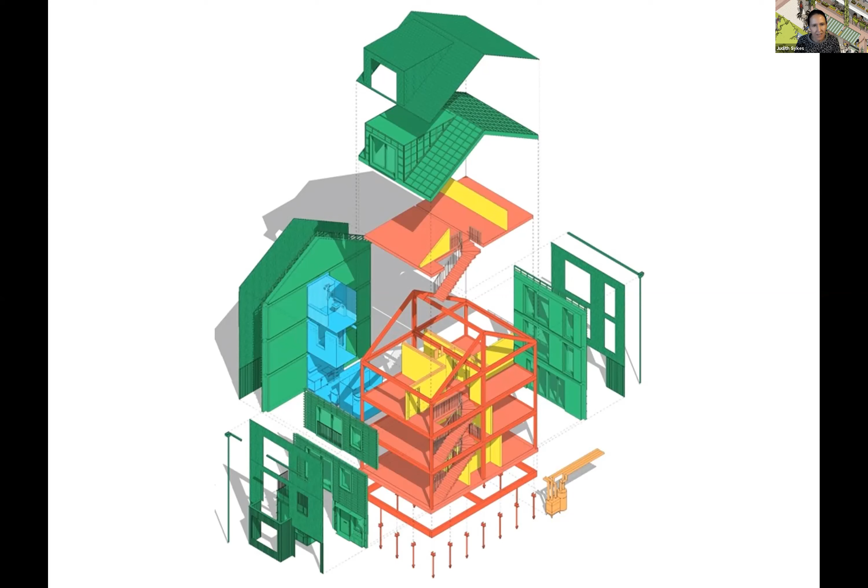If we go to the next slide, you know, whilst this was a competition, we did get down to the real detail about how these components work, and how a component approach resolves challenging pieces like avoiding thermal bridging within homes. So if we go to the next slide.

The other component of life cycle design - Will touched on this earlier - was the ability to reconfigure spaces and provide choice no matter where you are in your life and what your needs are at a particular time. This diagram, perhaps too subtly, shows how you can use different spaces within those homes for different needs - be that a home office, homeschooling, a workshop, or converting your upper floors into a flat you can let out once your kids have moved out. That ability to reconfigure spaces to suit lifetime needs, and have different tenure types within it, was an absolutely critical part of that design.

And that's because, if you go to the next slide, as Will said, one of the key themes of this competition was age-friendly and inclusive living. That central theme of adaptability is key, but supported with the latest technology to help independent living. But fundamentally - Sarah will touch on this a bit more - it's about the landscape and the spaces you create outside of the houses that bring people together.

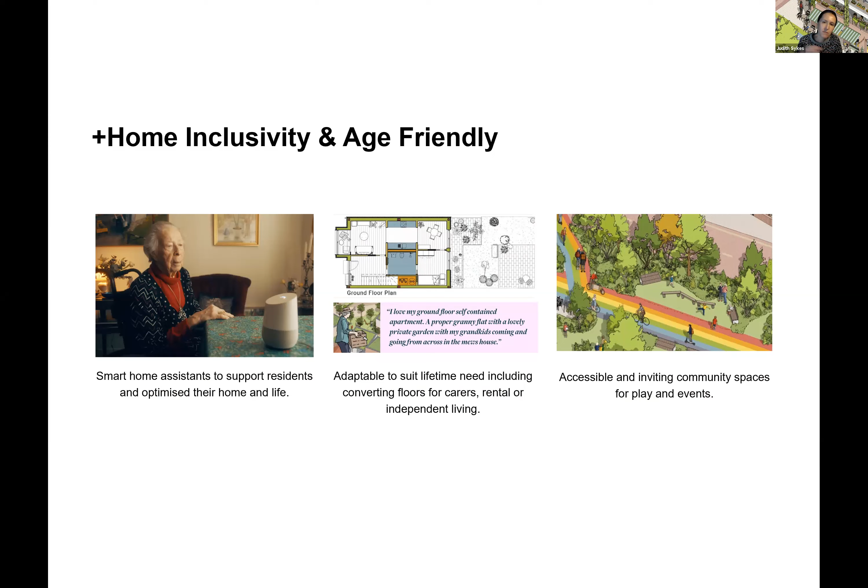This next slide shows how some of those principles were developed in an early sketch, showing how that reconfiguration space works, but also how we've designed in some really important but simple details - things like the modern day stoop, a seat where people can sit on the front porch and watch the world go by, or the stable door, which you can leave open so you're connected but not necessarily connected.

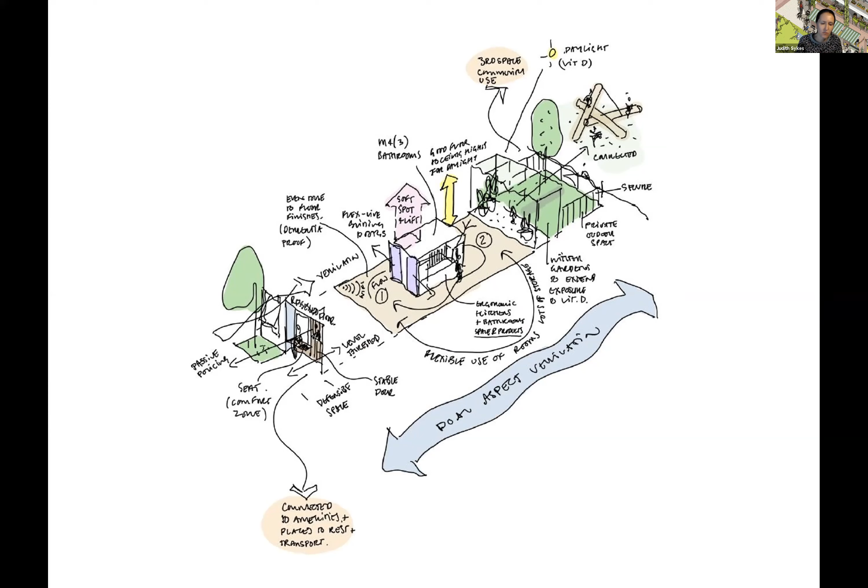So we did work through a lot of these details, so it worked at the master plan scale but also at the detailed scale. If you go to the next slide - I've talked a bit about this already so I won't dwell on it - but ensuring we created homes that could incorporate the latest technology and do so in a way that can be easily reconfigured, so all of the servicing and systems can be easily reconfigured to suit changes in technology.

Whilst it was also just a competition, we did invest as a team in securing accreditation reviews against Home Quality Mark, the HAPPI Standards, Building for a Healthy Life, Homes Plus, and Building with Nature, because we felt that this collection of accreditations touched on all of the core themes of the competition, and it was important for us to get that third party view on what the Home of 2030 and the +Home particularly was delivering.

I think on that note, I'm handing over to Andy to talk about the materials and build barn.

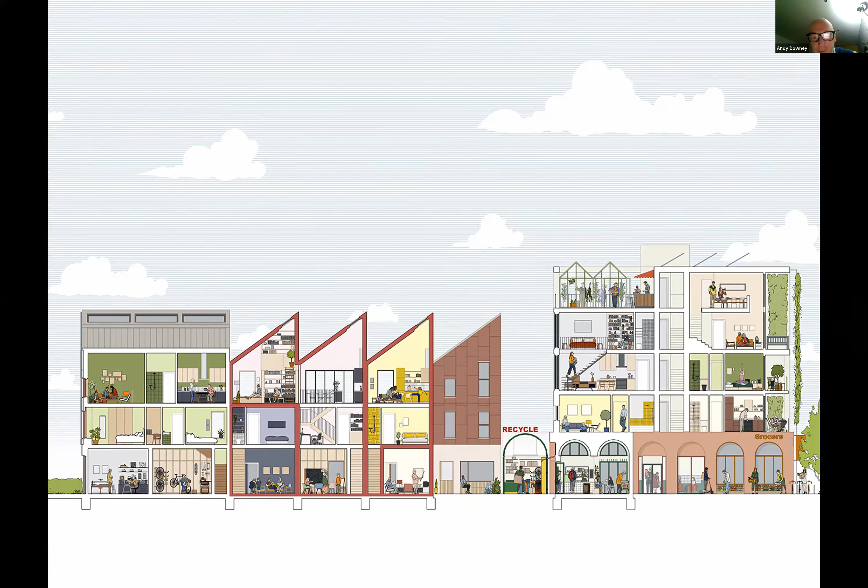Next slide, Rob. Good evening, everybody. Change the slide, sorry, I didn't hear the prompt. Thank you, right.

One aspect of that was making the project materials agnostic. That might look like a bit of a cop-out when it's quite obvious the answer, where you build it out of timber. But maybe timber isn't the answer. Maybe in some of these places, it's a different material, or there's a different material that will be available tomorrow. So if we were really smart and created the right type of platform, other types of emerging materials could use this simple method. So we quickly started to focus on the pieces that Judith mentioned, which is a frame and filler, or what we ended up with, structure and skin.

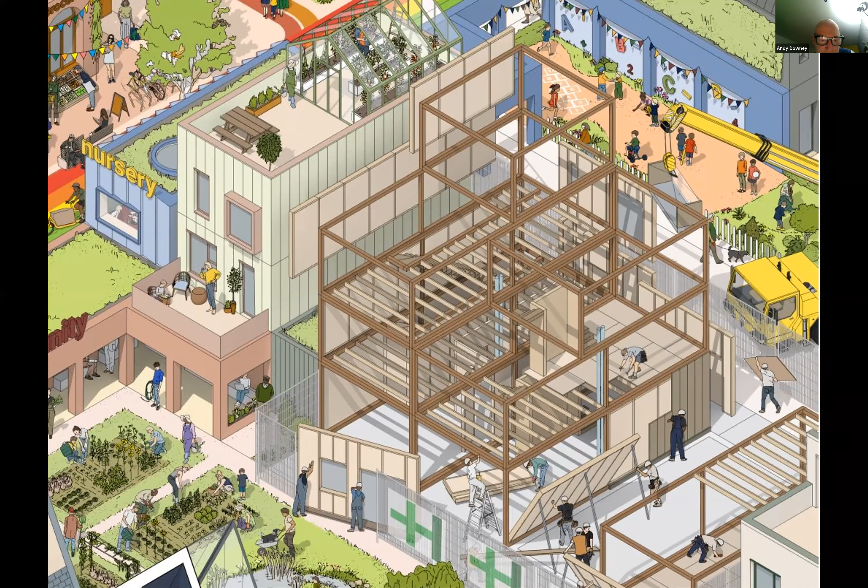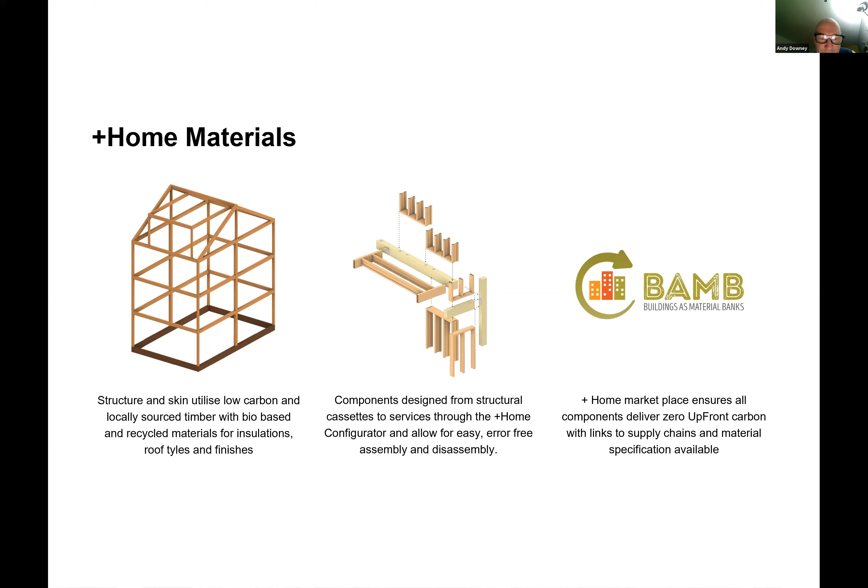I've just touched on this very simple componentry, and we started to look at much simpler ways of connecting things, drawing from the mighty IKEA and their very clever connections between things with furniture that are hugely efficient in terms of use of material, and they perform well. So rather than just reaching for the answer, which could be a whole load of galvanized metal bracketry, what are the simple things that we could use with modern methods of construction to join our components together and allow them to be removed and replaced or repurposed in the future?

There's another slide here showing how these sections can push in and be taken apart. And we spent a lot of time just thinking about how you would actually unfix something, or whether the fixings would be lost forever within layers and layers of plasterboard and insulation, which is the reality. Next.

I'm going to talk about the weather now, because one of the things that when you start to talk about modern methods of construction, you also have to realise what the weather is like in the UK and many other places. I always want to get the stats right, but the average number of wet days in the UK is 133 per year. So that's pretty much 1/3 of your build time will be impacted by the weather. Add some hot weather in the summer - my brother lays bricks, very difficult to lay bricks in July and August these days because it's too hot. So what do you do about this weather that's impacting trying to produce something of high quality?

Well, a modern method of addressing it would be to try and remove the weather from the equation. So we started to have a look around at different industries, and we tripped over somebody from rock and roll, essentially, from the business of putting on stadium events.

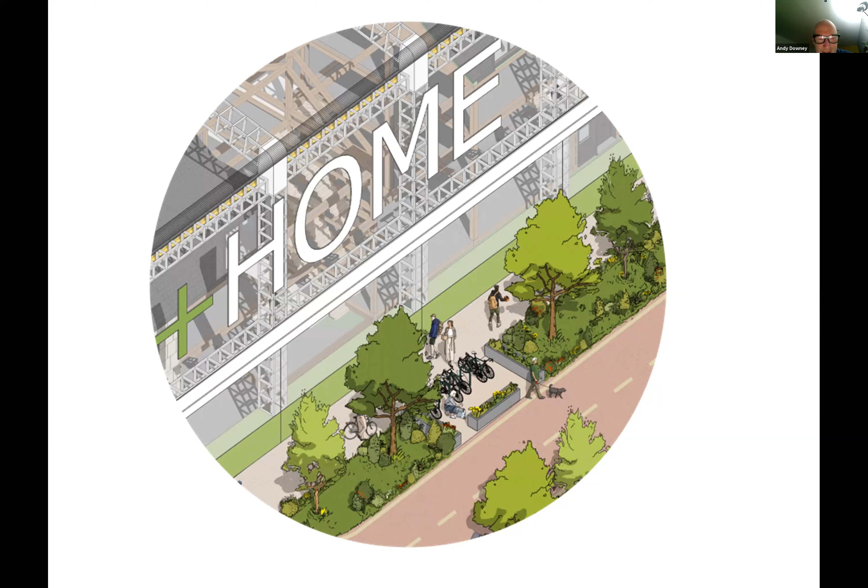From that, we used the build barn itself, which is a series of pre-made components from the workshop that was just a few kilometres away, as it turned out, from the site in Nottingham. We also added gantries with robotic arms, and there should be some other robots spinning around within the space. Now that, at one level, could be a little bit future-gazing, because the real gain here was that we took weather out of the equation.

So in theory, if we wanted to sweat this asset, we could work this site 365 days a year. The benefit of that is it might suit workers' routines at home. You could spend more time with children, then do a later shift, or work through the night if that suited you.

What that resulted in was that it completely changes the amount of time it takes to erect these buildings. So rather than saying you might save a bit of weather, you might save an awful lot of weather—all of it—and condense the program by a factor of 3 or 4. I can't remember what we finally came up with, but we had a bit of fun trying to work out what factor we could condense the program by, and it was absolutely enormous.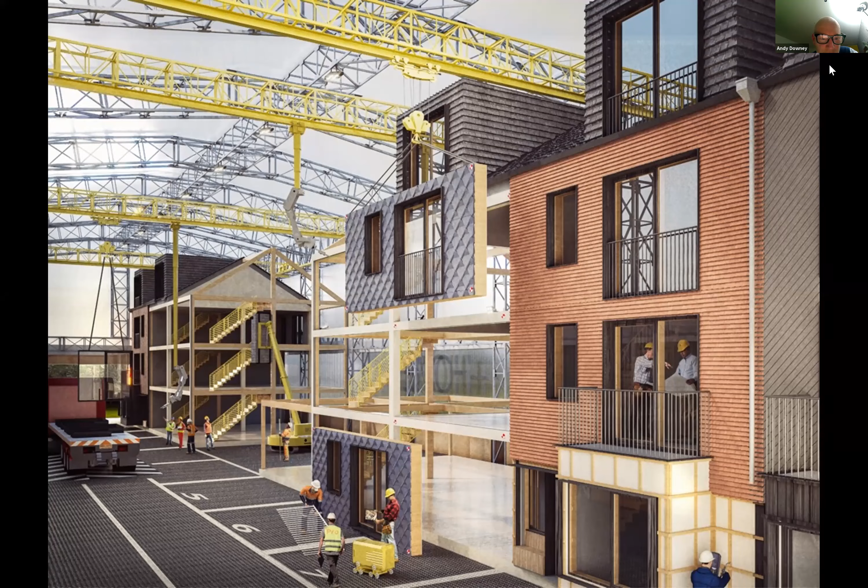There was another slide, not in this deck, but we also wanted this to be able to look in and see what was happening. Rather than it becoming something dangerous where you're not allowed to see what's going on, we wanted to celebrate the theatre of making these things. You could have a viewing gallery and experience the homes being built, and also see some of the emerging technology—a version of Spot the Dog checking everything, or the robotic arms assisting with erecting and positioning the panels on the building.

So again, technology that was already in existence, and we were using parts of it to help make these homes better.

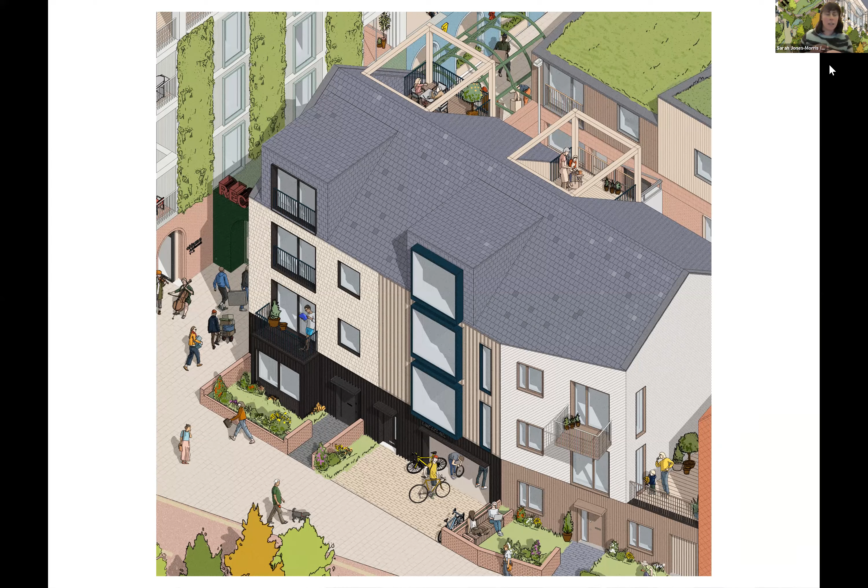And the approach on this particular project was evidence-led and systems-based. To have systems, you have to think of this as an ecosystem for humans and nature to coexist. For that to happen, you have to work collaboratively, talking with engineers and architects about how this can all work together. They're not mutually exclusive.

So we started thinking about things. The three headings that Building with Nature have are well-being—so health, and that impact includes movement, active travel—wildlife, which isn't just biodiversity but wider connections as well, and water. This is a really crucial point about water. It's not just about flooding, it's also about water quality and how we reuse it.

So we were starting to look at what the specific focus should be, what is the priority of this particular project. It's interesting, I think it was touched upon in Goldsmith's presentation previously, things like wanting a diverse landscape, but also creating more front gardens, concentrating on the design of that, which I'll touch upon a bit later.

Also about 8 to 80 cities, creating cities and places suitable for an 8-year-old to an 80-year-old. I know we're talking about age-friendly, but this is all ages. If we're talking about the layering of things, particularly in COVID at the moment, we need to think about not just play for children, but play for adults too. We need that.

And also the aspects to do with habitat connectivity. Once we touch upon the fact that in the future we might have fewer cars—what are streets? Are they for cars? No, they're for people. And why couldn't they become extensions of parks, a whole new thing? And I say new—it's not new, but it's new to us now.

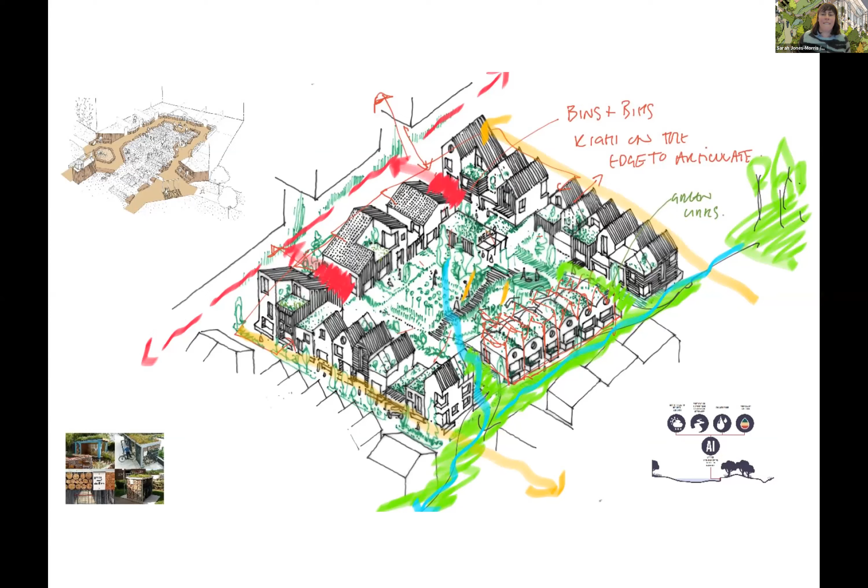So we started to draw out these particular topics—what is it? And you can see how it starts to knit together these interrelationships, like the focus on a diverse landscape being important in terms of health and well-being, how children's-led play is also a relationship, as well as the social cohesion aspect related to how public health data works.

So move to the next one. I'm just aware of time. I could go on talking about this forever, and I know we have time.

So that interrelationship is also—you can see how we started looking at how those communal gardens could work, and how the private gardens and front garden spaces work as well.

At the end of the day, people want this diverse landscape aspect, like the communal garden. The great selling point for people is you have this broad space, instead of hundreds of closed board fences like you see in so many housing developments. You've got something meaningful, a social aspect, but also private space too. You need that mix, some people want privacy, some want shared space. We looked in quite a bit of detail at the microclimate aspect too, but I know we haven't got time. Moving on.

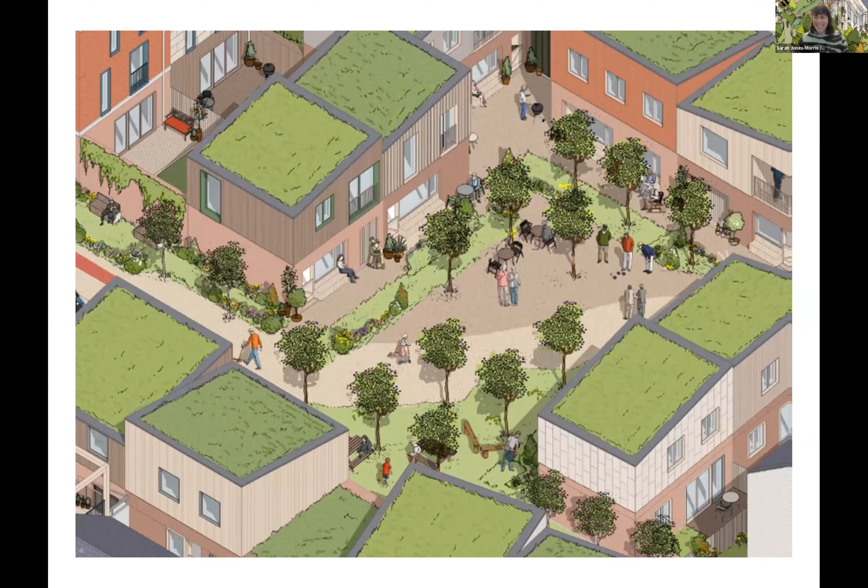Against this idea of future growth, instead of having leftover spaces, these become meaningful spaces that tie in different components. I love the little detail in these sketches of play areas, incidental spaces people can use for playing outside. Where I live, a lot of people play dominoes in summer, a really fast game, but they bring their chairs and seats out to do it. It activates things, it keeps things lively.

The other thing we really mustn't forget in all of this is soil. There's no point aiming for health, growing vegetables and biodiversity if you've got really rubbish soil. I think we've got to consider this because it's underplayed and forgotten. I've been on so many sites where they just dump a load of rubbish soil, or think it's rubbish, without realizing there's this whole aspect you can think about. One particular point I'd like to pick out is whether the compost created within these neighborhoods can contribute to the ecosystem and the health of the soil too.

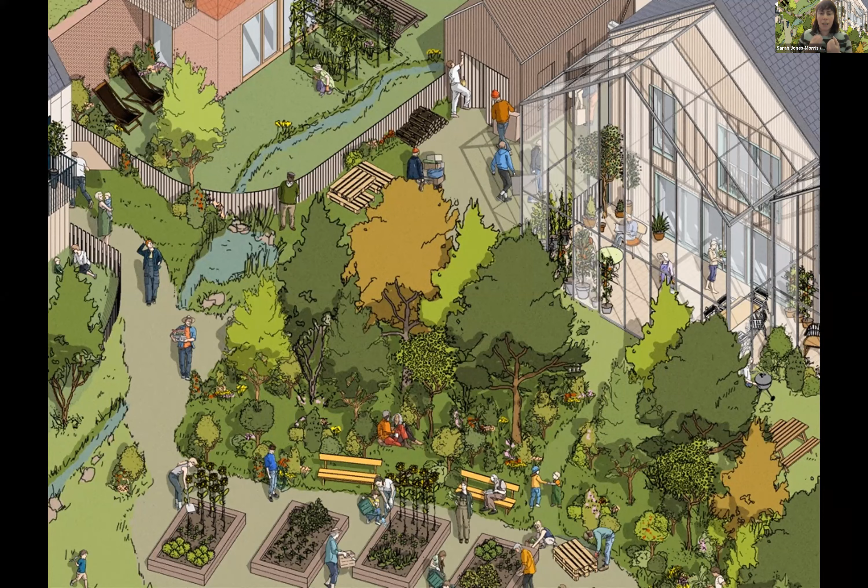You can see how I was touching on the interaction of water. But when I talk about systems, what I mean is this: could the water from the building be stored under the road and then released when it's hot, so the trees absorb that water and reduce the temperature? Then you've got a connection between the building and the landscape. This is what they've done in part of Lyon — it's not pie in the sky, this is actually happening. Where it gets too hot, they release the water and that reduces the microclimate. If you reduce the microclimate, it has a bigger impact on the macroclimate.

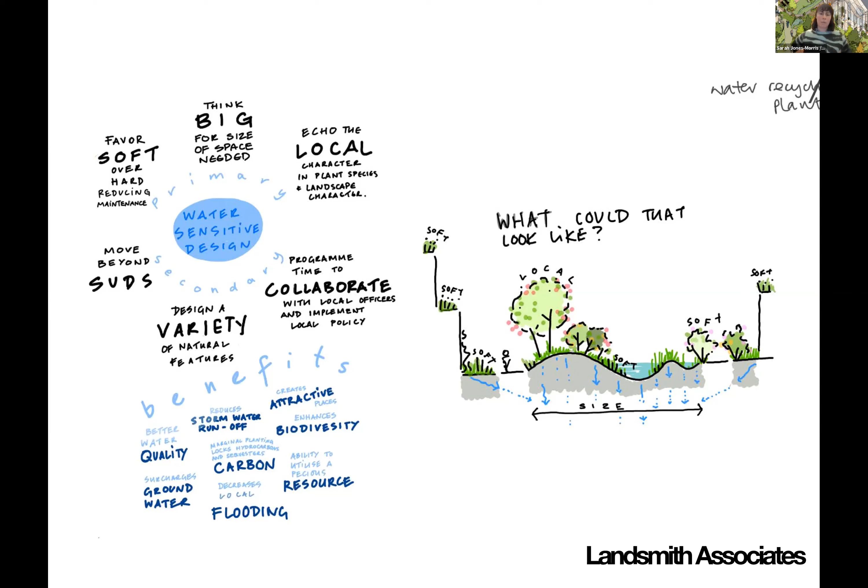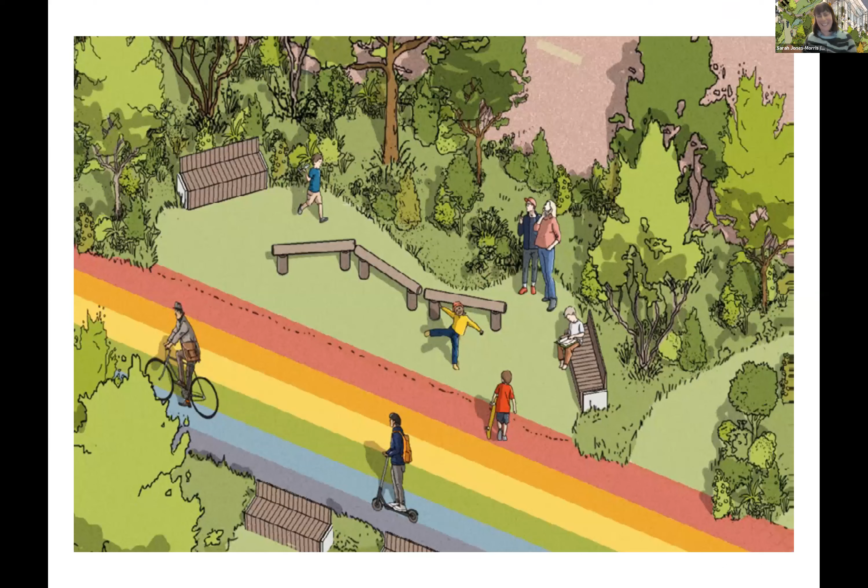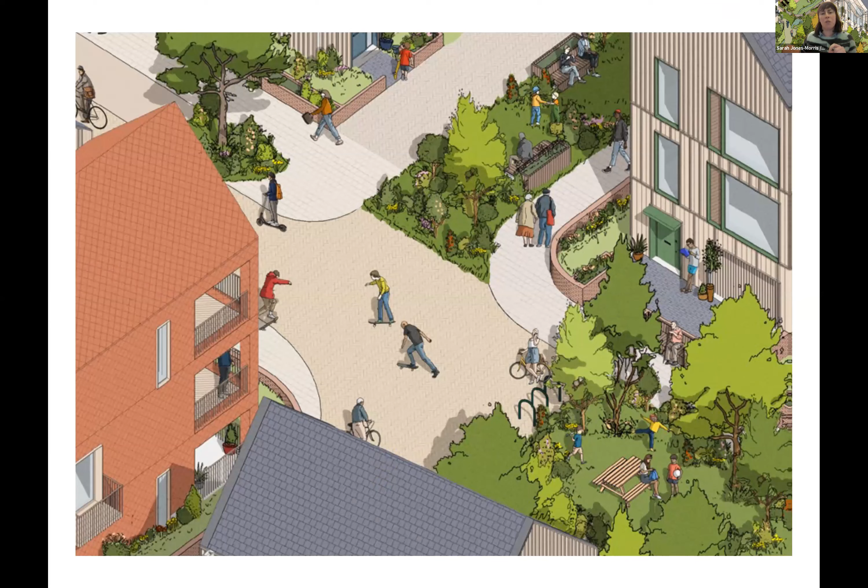Can you speed up a bit now, Sarah? Yeah, I can whiz through these. As you can see, we have indoor and outdoor. Do you want to move to the next slide? Also about adaptability and play, focusing on children walking and cycling. Do you want to move to the next one? And the importance of the design of junctions - it sounds really boring, but where you put that drop curb, where you put those materials, has an impact on how people use the street. Do you want to go to the next one?

Also about the interaction between play and the focus on how people and children get to those places, creating hubs locally so it doesn't feel a mile away from where your home is. Do you want to go to the next one? Are we there? Is that the last one? I think - oh, there we go.

Anyway, this was just a quick piece to say thanks very much, Sarah. This scheme is now within the Vaux site - I don't know if you recognize that as Vaux - but there's a feasibility study going on at the minute to try and introduce the 6 finalists of the competition within the site. So that's a really exciting kind of spin-off from this, if you like.

Okay, thank you very much, Will. Thank you very much for the passion and the wonderful pace at which you all delivered it. And I think you take the prize for finishing on time, actually.

Anyway, a few words about this particular project. I should have announced it as being one of the winners, a joint winner of the Home of 2030 competition. We're working hard to see whether we can help deliver this particular project - working with Homes England to see whether we can enable the winners to build it out, and talking to Sunderland about how that might happen on the Vaux site. So really exciting. I think one of the reasons it was successful was because it tried to touch on so many particular issues - it was rich in content.

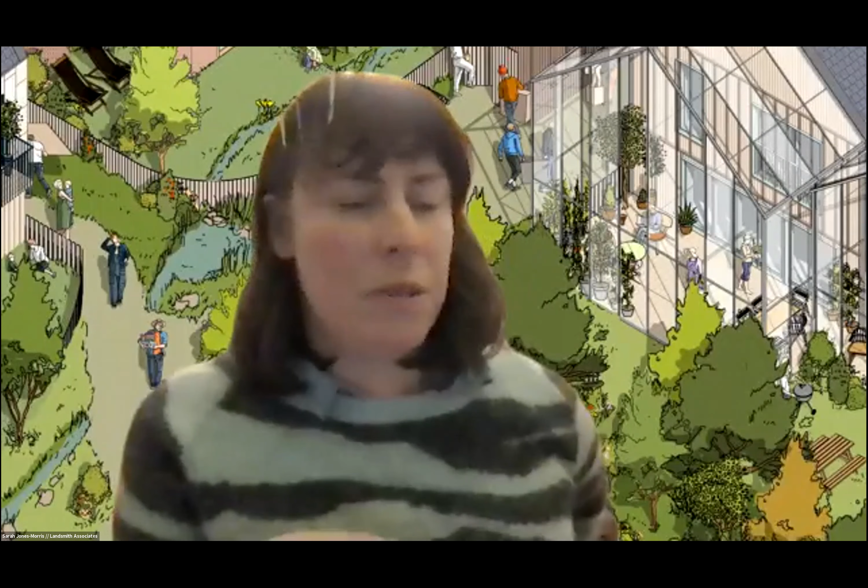Amazing, yeah. I think also, just to say very quickly, there's an openness. I didn't feel that anyone was constrained by their discipline. It wasn't like, because I think this is really important, don't feel constrained in your knowledge, always test things to be able to open up discussion.

Really good. Okay, I've got a couple of specifics which came out of the chat. One is this concept of working in hours, not in days. Really interesting, and I just wonder whether Andy or Will can elaborate a bit on what the building undercover is about. At first sight, it looks like there's a factory on the site, but it's not that, is it? It's actually a canopy under which you are constructing. So could you elaborate a bit on this working in hours concept and talk us through it a bit more?

I think where it came from initially was the suppliers of the enormous barns, as we called them, and their programs. They looked at everything in meticulous detail, and they never gave themselves an excuse for something not happening. There was always an opportunity to make sure it happened properly. Another quote from quite a colourful character was that if Elton John's going on stage at 8 o'clock on a Saturday on the 24th of June, then that's when he's going on stage. You can't just say we're going to be a few days late or a few weeks late or a month late. And that mindset means you work things out in hours, so you know everything.

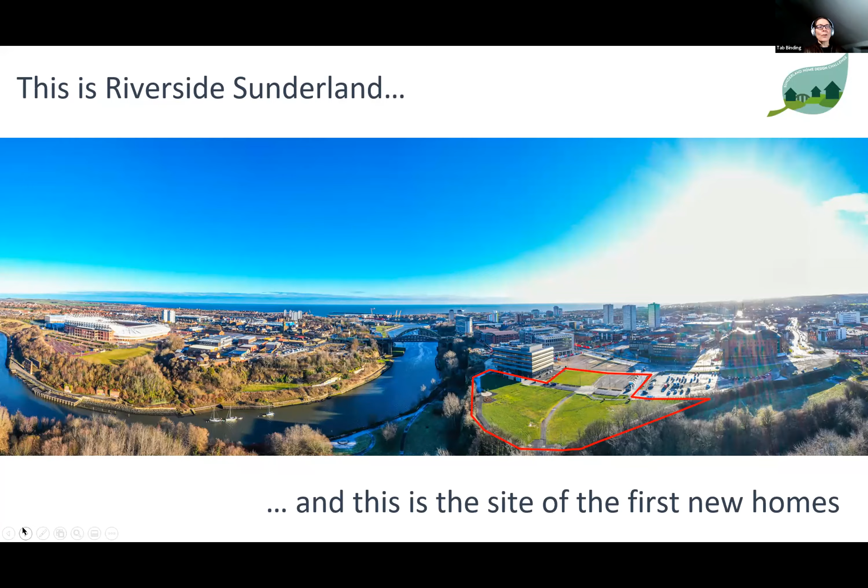So yeah, a range of absolutely fabulous speakers. Thank you so much. Just to come back to the competition, this is your site at Riverside, Sunderland, and this is the area for the first new homes. You can see where the site is and where the city centre is, and it is right next to the river.

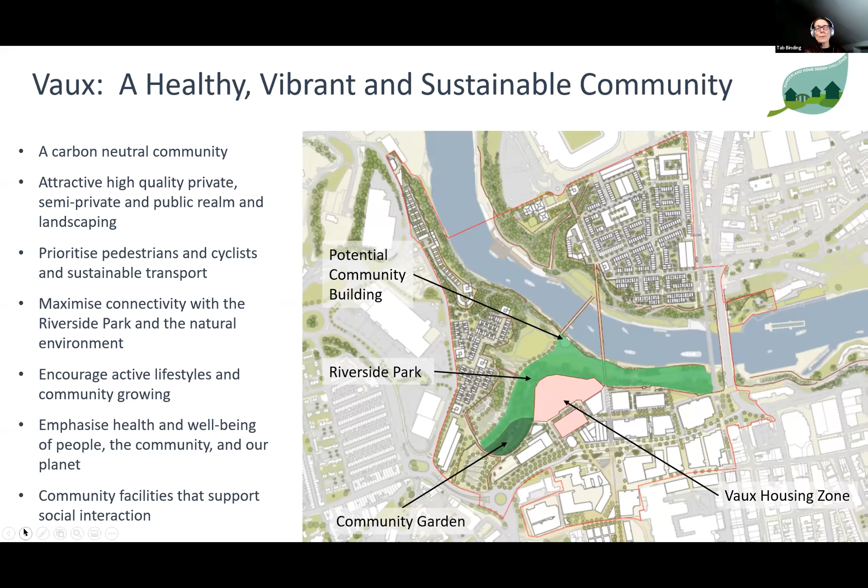The site context is on our partner's website, so it will be on Mobie's website, it will be on Trada's website, and also on our sponsor's website, the CTI. We're asking for an indicative master plan with 100 homes on it, but one home in detail. And yes, we will be looking at counting the carbon, Andy. So we have a tool, one of many tools. Unfortunately, not all tools are equal, which is unfortunate, but we have gone with a particular one.

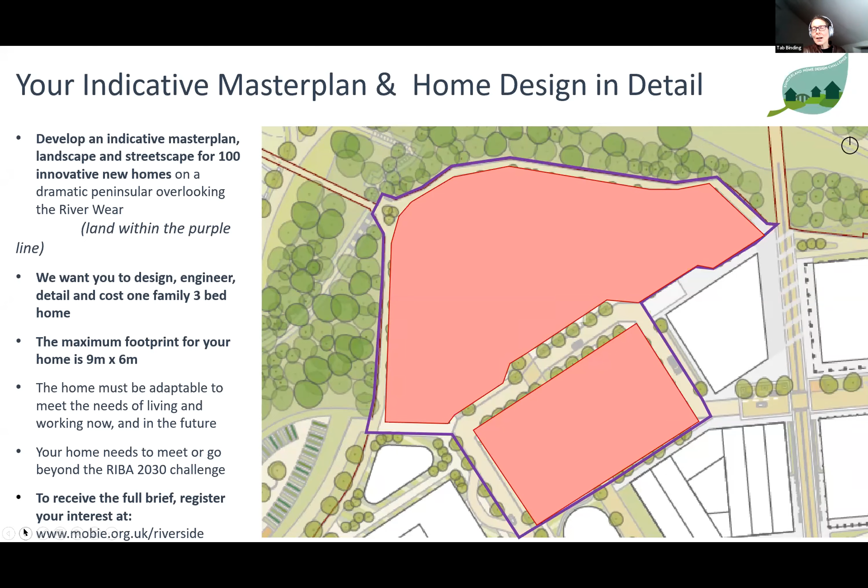We're asking you to work as teams of a minimum of 4 or a maximum of 8. And as Sarah was saying, or Judith, argue, debate, ask questions, learn the language of the other professionals that you will be working with. And tomorrow night, we have some of the runners-up.